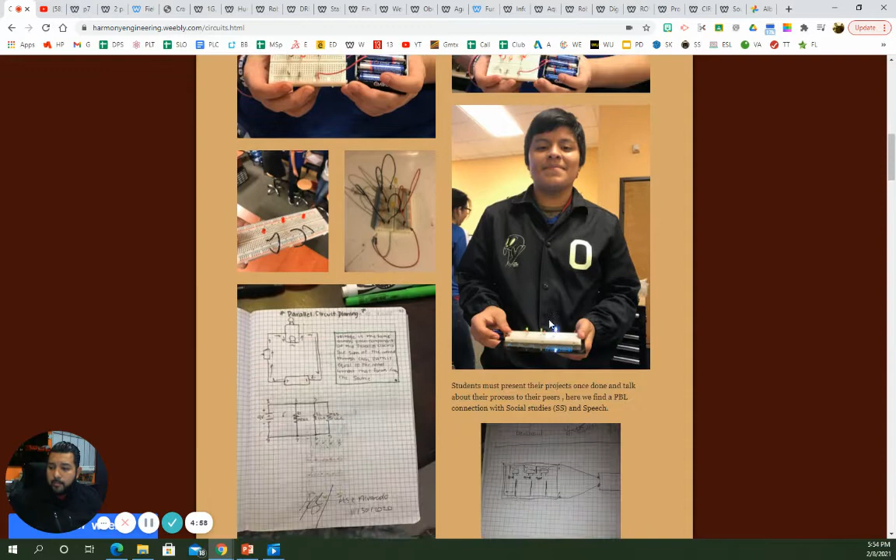Then the students have to present their projects every time they do one, and we get a great response in grades 10, 11, and 12. But for some reason, in grade 9 it's a little challenging to bridge that gap because the students are a little shy—they don't want to talk so much. I had students approach me saying, 'Oh, Mr. Cepeda, can I just please present after school when I'm alone?' And I'm like, 'No, you need to present in front of everyone. You need to present in class. Take your time.'

Perhaps you want to sit this experiment out, and then eventually you need to talk in front of people, so that they can get their confidence going and feel good about themselves, and then they get used to being able to talk in front of people. That's pretty much our main goal.

So anyways, we start with a little bit of theory. We give them a problem. They have to present once their experiment is done, and then they have this engineering journal where they talk about the different ideas they have and their approach. They do a little bit of research about their experiment.

This is a great way to connect with other classes because here we can talk about grammar, about the way they talk and describe their experiments. This sort of writing connects with the English department, and it helps out a lot, especially with our ESL students, because since they're learning the language, this is good practice for them. They get to learn about it here in engineering, but also in a regular English class, and it helps them practice. Sometimes they record themselves and practice, and that's a way to improve their skills.

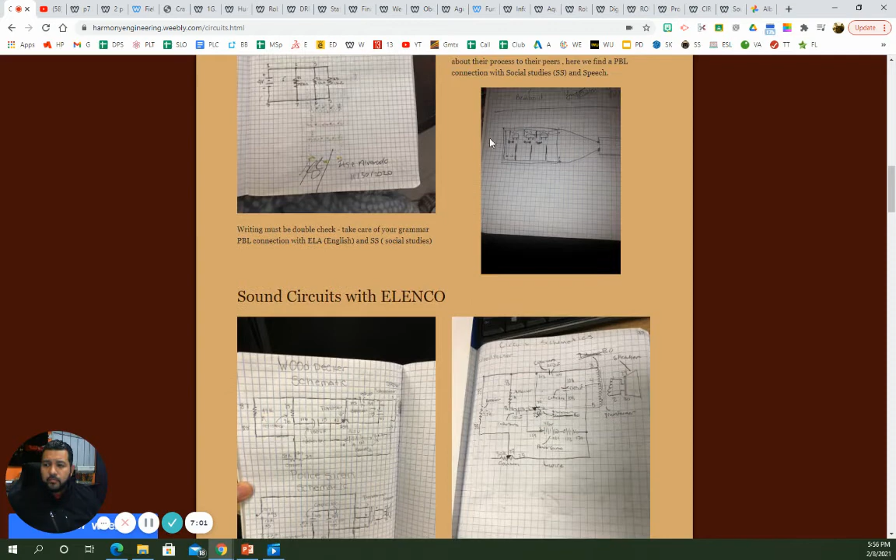Sometimes we get a little bit more complicated, but it all depends on the experiment. In this particular one, we began to talk about sound circuits, and I use this lab called Elenco. It has a manual, and I love this manual because it gives you a brief explanation of what the experiment is about.

It gives you the schematics of the experiment, it gives you a wiring sequence, and then it shows how your project should look by the time you finish. I love this because once the students are done, they can check their wiring with the picture. I also ask them to use it in their journal.

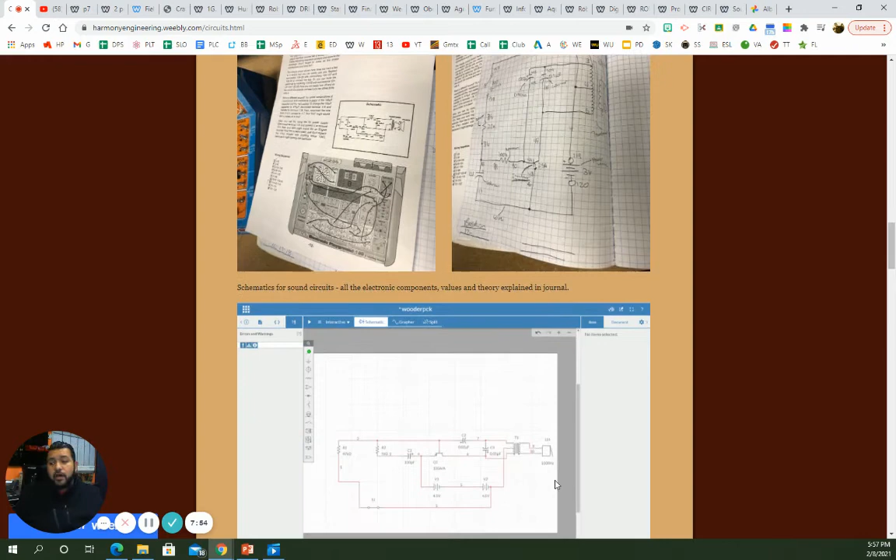So the first steps are to intro the topic. Then I ask them to draw the schematics in their journal, and then I give them the set of instructions. After that, I ask them to use this other software called Multisim, which is for creating and testing circuits.

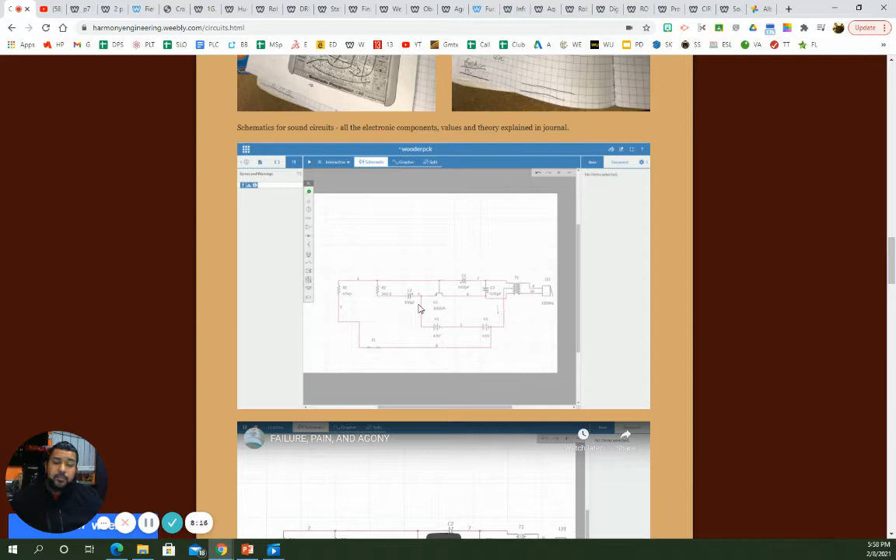It's a virtual application that we use on computers, but I like this particular one because it's live—it's called Multisim Live. The student can build their circuit in a live session, and it doesn't matter where they are, as long as they have internet access, they can build it, test it, and observe how to put it together.

They can find all these different parts with a little basic knowledge of electronics. They understand the different components and their electronic symbols, so they can find capacitors, transformers, or other electronic components. That's another tool I use with this particular experiment.

After they're done, we use this other program called Tinkercad. With Tinkercad, once they know what they're building, they can find all the different parts of their experiment here. Then they can use a breadboard, put all the components together, and test it. So not only can they test using this computer program, they can also test it, and then once they're done, they get to build them physically.

So then they build all these different circuits. Most of the time we start with sound circuits because they're the most fun, since they create a sound. I allow them to do 5 or 6 different experiments, or as many as they want, over a process of about 1 week or 3 different classes. They're using wires, connecting components, observing what they're connecting, and then once they're done, they create a sound.

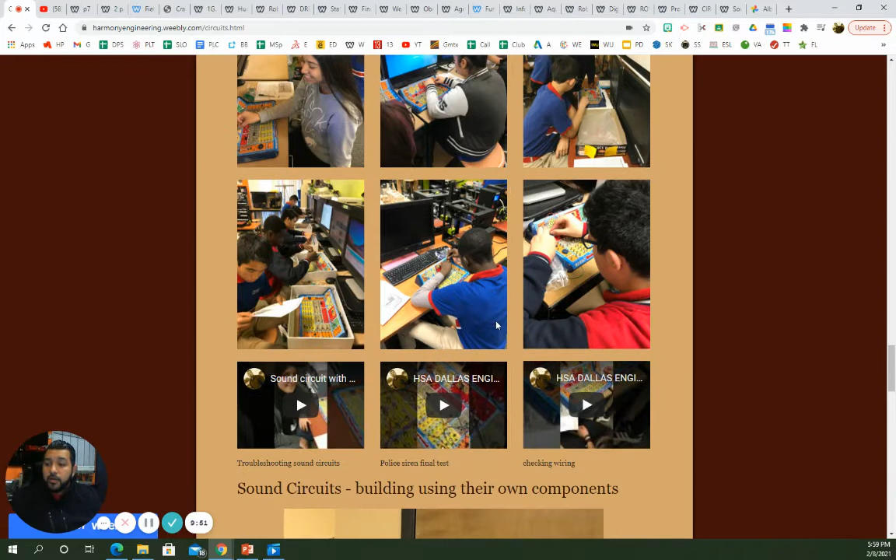And so here's an example of that.

Once somebody has that sound, everybody else gets excited and wants to be able to finish, so that's great for that. They also get to troubleshoot if something doesn't work, then they talk about it and learn how to connect everything together.

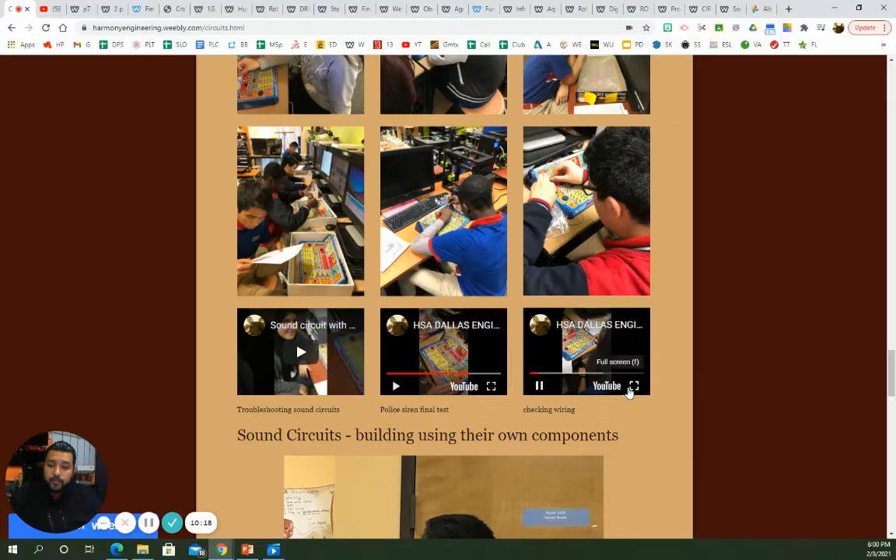First I connected all of the wiring where it's supposed to be and checked that the wiring wasn't messed up, because if it was messed up, one of the components would burn out and damage the whole thing. Then I had to switch some wiring too because some were dead in order for it to work. Yeah, see?

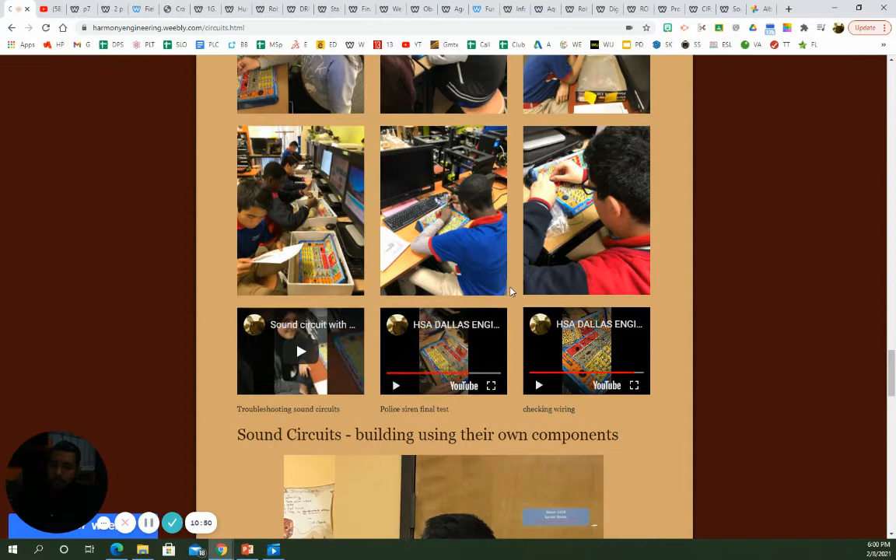So the best thing is that they're learning, then they're looking at the different components, building their own circuits. Once they're done, that's the second part of this project: I asked them to build their own circuits with their own parts.

For some students this is a little intimidating, but for students who really get into the whole world of circuits, it's a fascinating thing. So they begin to research all these different components for their circuit.

The advantage is that they already built the circuit here, so they're going to build the same circuit again, but this time using their own parts. They have to look for a speaker, voltage, some batteries, a transformer, and all those different components to put it together.

They have to be a little artistic to put everything together, all the information, little graphs. And that connects with mathematics, because you can talk about graphing, about data, and about all these different topics for that particular classroom.

So you would ask the teacher ahead of time that you're doing this with them and that you're going to be using graphs. Perhaps the teacher can talk about graphs in their classroom and ask for something as simple as a worksheet that students can turn in with their project. That would be a way to connect with this other class.

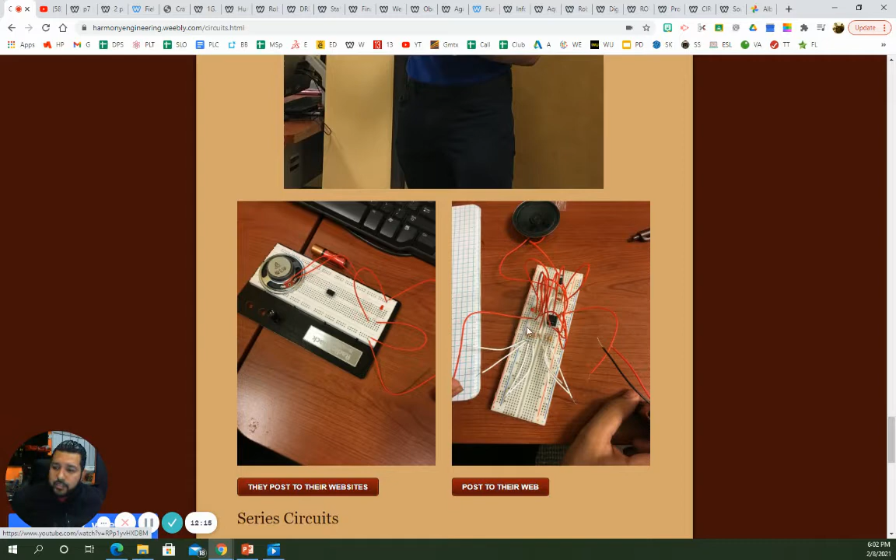As you can see, they have their own different components and everything to put together. And then once they're done, they have to create a website.

Creating a website is an easy process. I use Weebly, but there's also Wix and other similar website builders. The easiest one is Weebly.

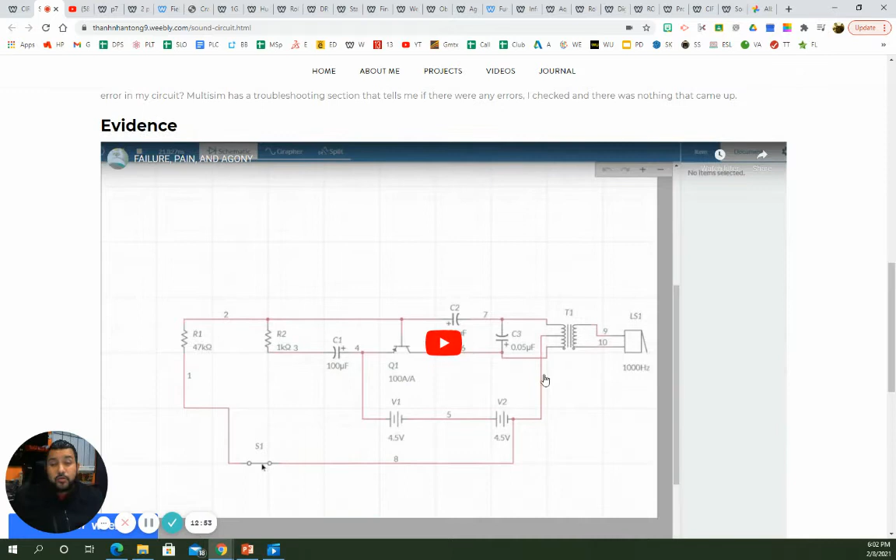So we use Weebly. As you can see, they use a title for their experiment, then talk about the problem that was assigned to them. They talk about the solution they thought of, and then provide some sort of evidence in the form of videos, like showing how they were creating that particular circuit I gave them earlier.

Then you can see the Multisim version here, all the different components, which they can add in the middle and then test. So they can virtually test their experiment before they build it, and that's important, because if it works here, it should work once they build it.

Then they need to add a few sources, and then give their feedback. I like these web pages because they can keep all their projects organized and keep all the information organized.

You can see the different tabs here for all the different projects, first semester and second semester. There's a list of different videos from the first and second semester that they watched, and a copy of their journal as well on this web page. So that in itself is a different project.

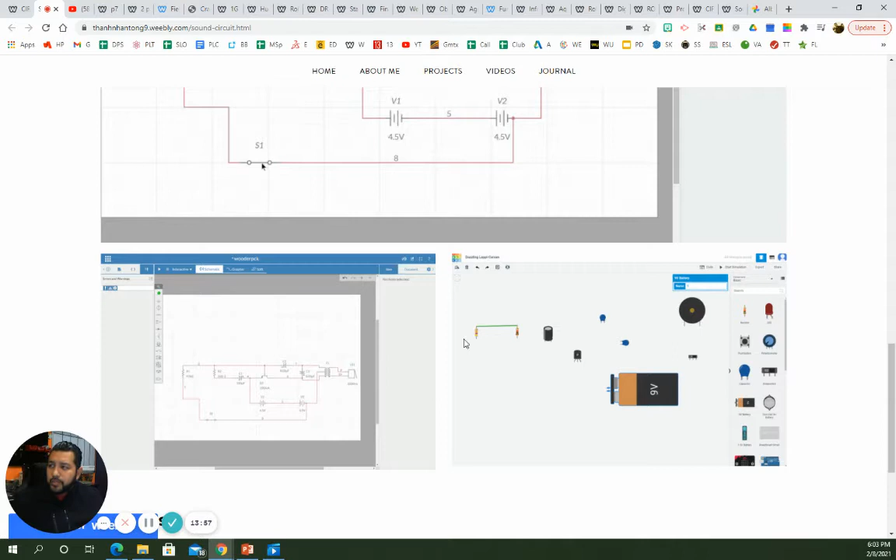So that would be the last step: to put everything together and post all the projects we have going.

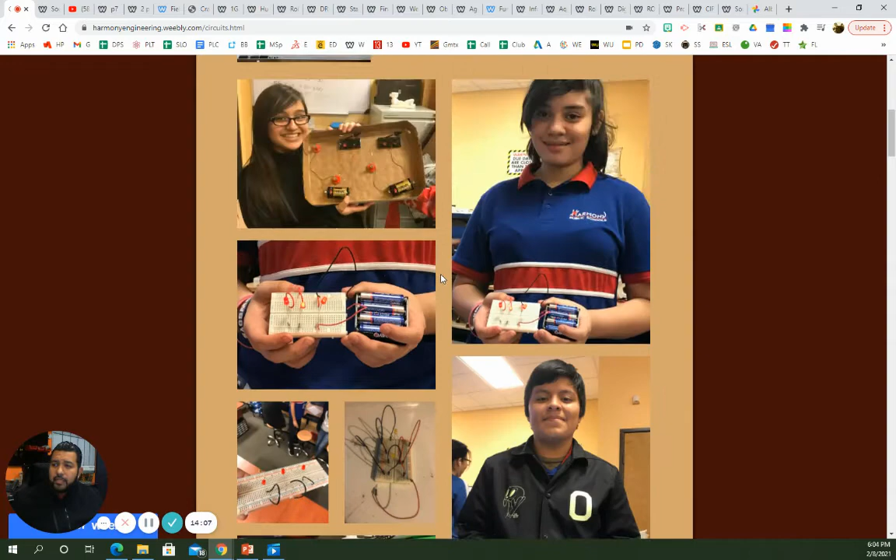Just to recap, the student is expected to pay attention during lecture and class so they understand what they're doing and building. We give them a problem, and they come up with a solution.

Once they have the solution, they have to do different ideas in their journal and document everything, put annotations along the side, put different designs there. Once they're done with that, they need to create their project, their prototype. And once they create their prototype and it works, they need to share it with the rest of the class, talking about their whole experience, the mistakes they made, and how they approached the problem.

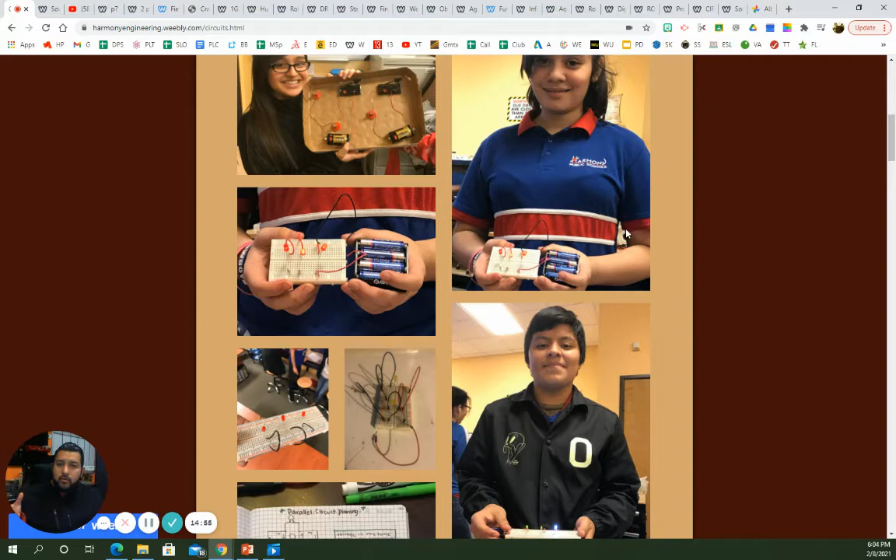Once we're done with that particular project, a simple basic circuit, either parallel or series, and once they've developed those ideas in their journal, they build it. Once they build it, they test it. Once it's tested, they compare with other projects by virtually testing their project to see if it works.

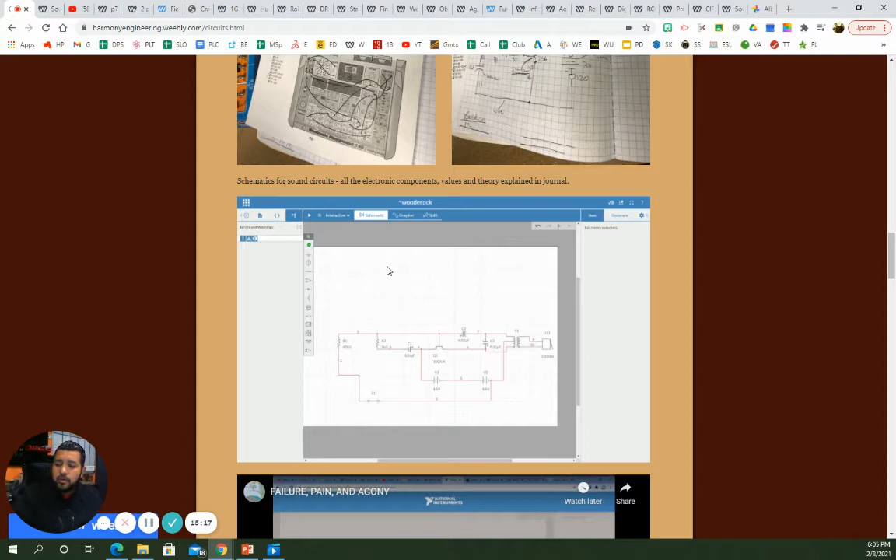They have software like Multisim Live, and another application called Tinkercad, so they can test their designs. And once they're done, they get to build it on their own. Then once they build it, they present to the rest of the class the whole experience.

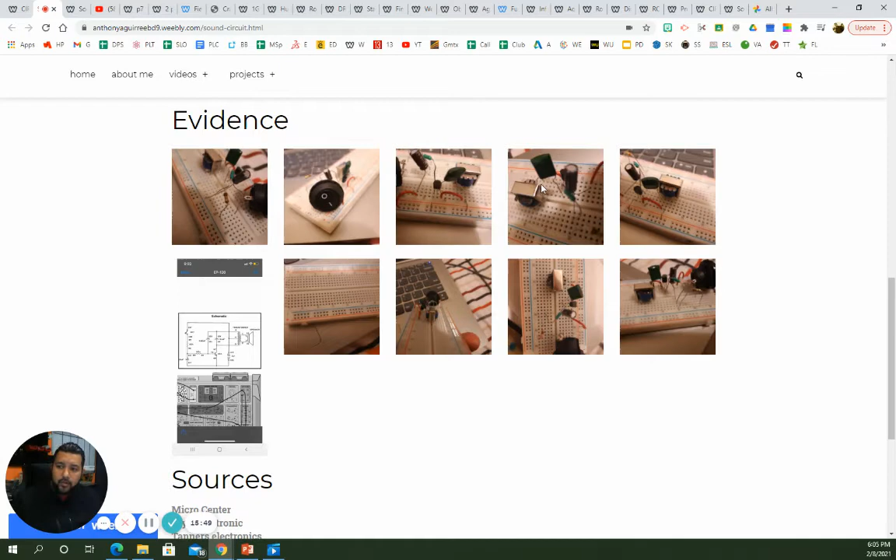Once they're done with that, they post it to their website, and on their website they talk about the whole process again, the different components, whether it was easy or hard, and we share all of that.

All these feedbacks and all this writing is also a way to connect with other classes, because other classes can focus on grammar, social studies, or speech, so they can voice out their whole experience. That's one of the projects I wanted to talk about, the evolution of the project itself, so you can understand how I use different projects from class to connect with other classes, and what's expected within that process for each project.

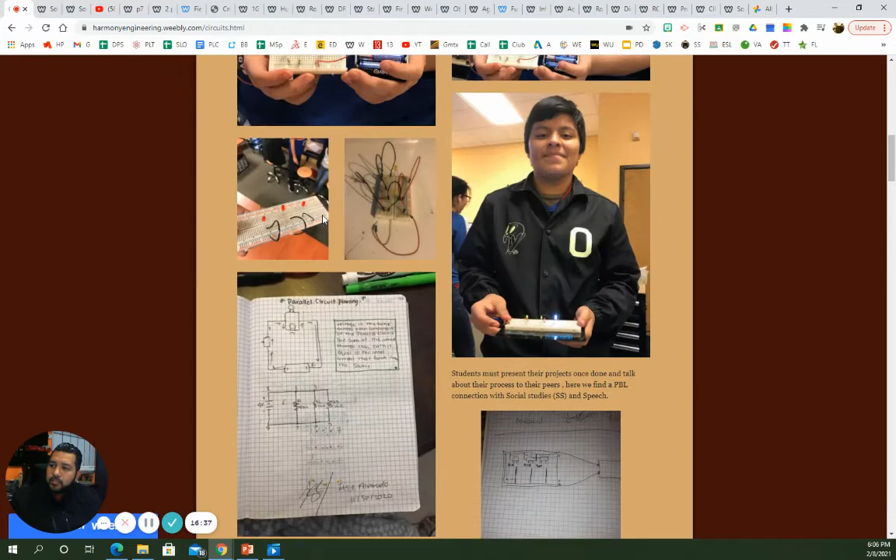Now I'm going to talk about all the different projects we have for our engineering class. Like I was saying earlier, I'm going to use this website, and go to this other one here called the Rube Goldberg.

Here's a Rube Goldberg experiment, it's a collision kind of experiment. One thing triggers another, and then it triggers another, and you use it to show there are all these different technologies and areas of engineering that in the end come together to put something together like this.

So we have different videos. They have to create a video, and then they have to present their video during class.

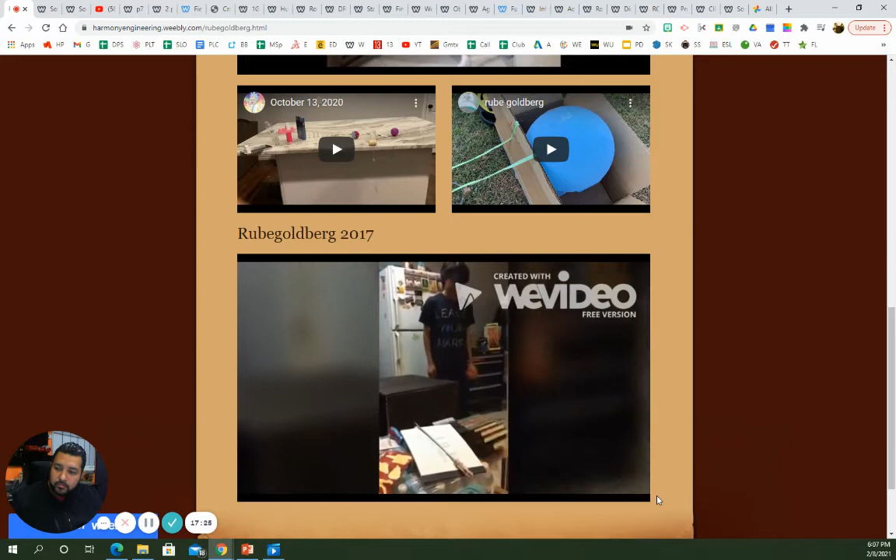This particular one was, they had to pop up a balloon. So here's their Rube Goldberg machine. That was a fail. Then they tried it again, that was a fail again, and then they tried it again.

As you can see, there's excitement involved through the process.

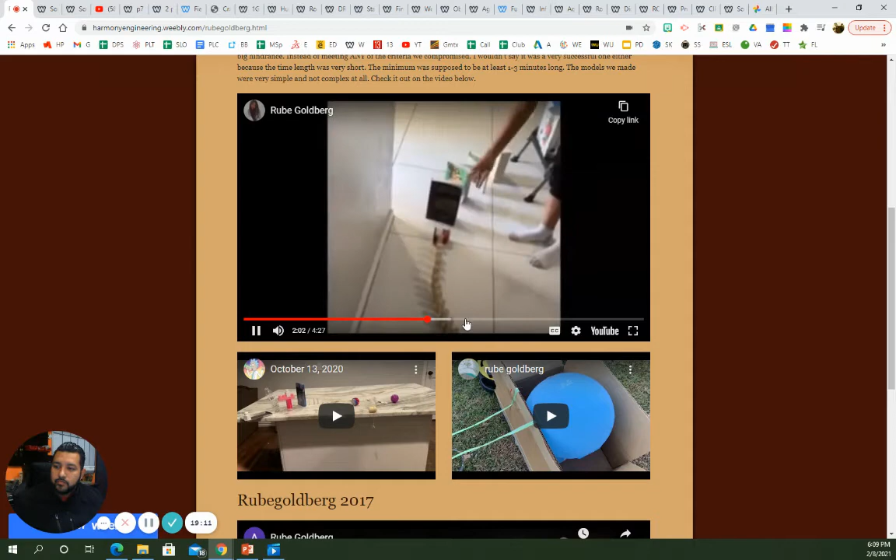Hello everyone, I'm getting ready to present y'all my Goldberg machine, and I'm going to explain the function of each station that contains the machine. To start off, this book is going to be thrown like that. What this is going to do is drop the boxes that are in this seat. As you can see, there's this bag of oatmeal placed on top of this box, and its function is to turn on the lights. I'm using two core technologies at once: the first is electricity, which I'm using to turn on the light, and the light bulb could be considered optical energy because it's using light, and that could be considered heat. Once this has been thrown like this, it's going to fall and turn on the light, and throw this ball into a box. This is my Goldberg machine, let's get started. One, two, three.

And so there you go, there's a lot of excitement through these projects. But anyway, that was another one of our projects, called the Rube Goldberg, and we use it to express different engineering core technologies working together.

Then we have this other one called the board game. In the board game, we talk about the different ages of technology, and they have to create a board game that they build themselves. Everything is custom made by themselves, and they have to choose a different age of technology as their theme.

What I like about this is that sometimes they get so creative, and they find a way to demonstrate their whole experiment, like through a skit. For this particular one, I really like the skit that they came up with.

Are you tired of your kids being on the phone? Get this board game now! This is fun, did you see how much fun these kids were having? Well, you can get this game board at paleolithicboardgame.com or call 1-800-PALEOLITHIC for just $19.99. You can get a special offer if you call now: buy one, get one half price.

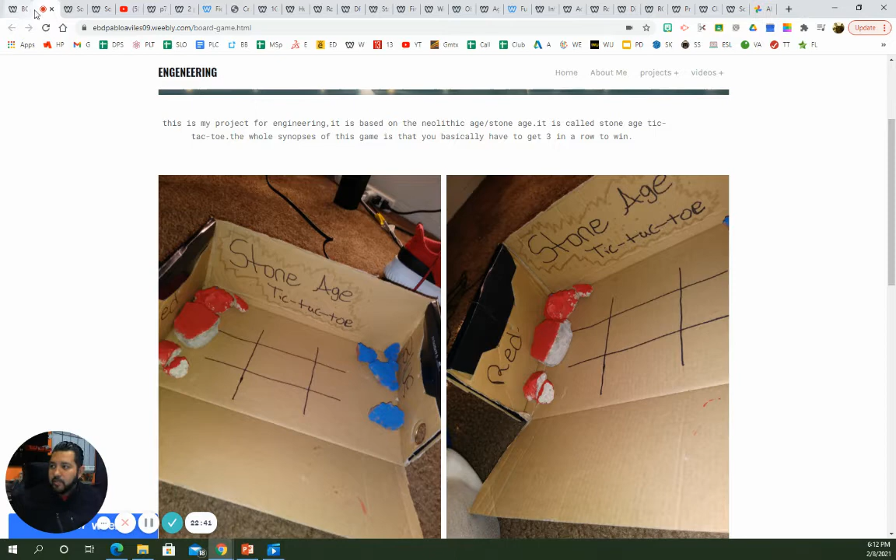Let me see if I can move to another one here. We have the one where we talk about the edible car. I like this experiment as well because they design it - they have to come up with an idea on how to create a car made out of edible materials. Everything in those cars is edible, nothing cannot be not edible.

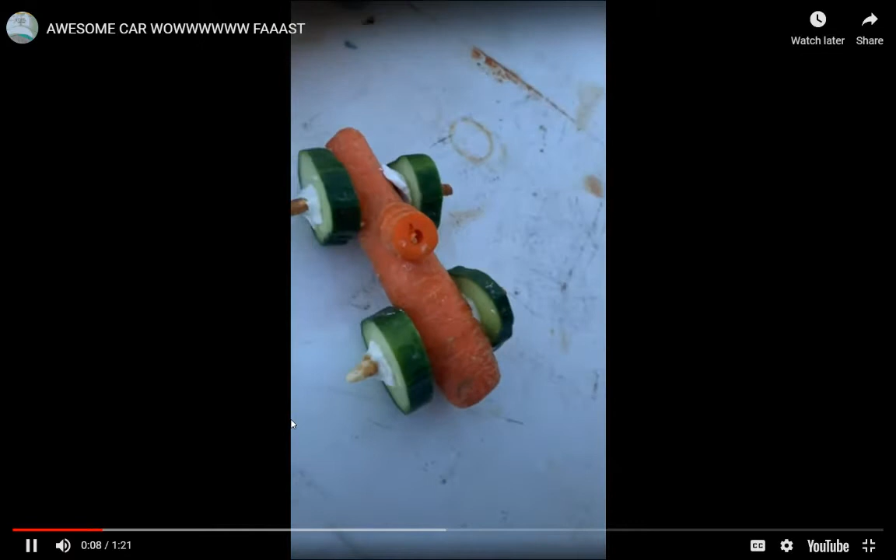And so then they come up with different things, and then they have to create their own videos. So this is my engineering car project - we were supposed to make a race car entirely out of food. As you can see, it's made out of food, and it's supposed to roll down a ramp. The car has to roll down a ramp without breaking, and it has to look like a car. I would say it looks like a car - some people would argue it doesn't, but I think it does.

So as you can see, they come up with their video and talk about their whole experiment. This is because we are in a pandemic, so they had to pretty much build their own ramp, because when they're here I provide a ramp, and they run their experiment through the ramp three times, and their experiment should not come apart.

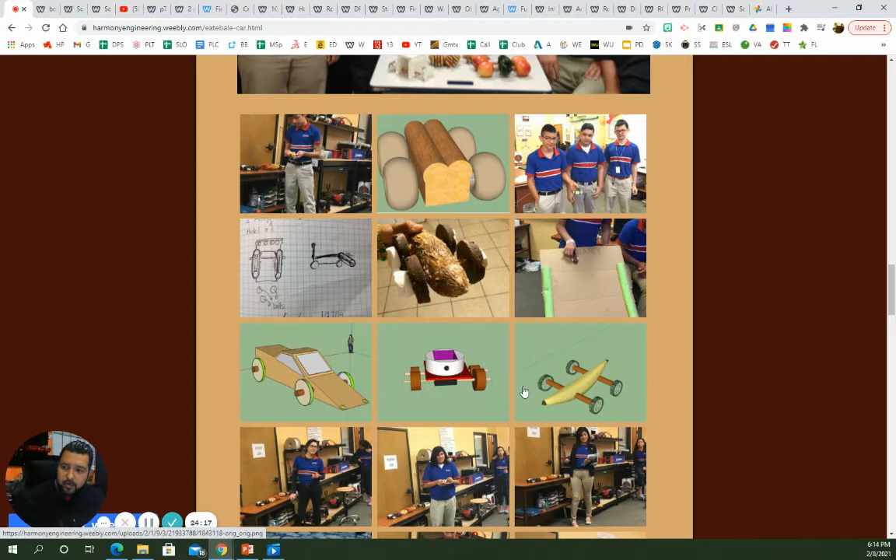So here are some examples from class that they built, and here's how they pretty much design in their journals. And then this is using CAD software, so they can pretty much show the expectation of their car and how it looks using that software on their computer. And then they get to build it, and present during class.

And here are different examples of the different kinds of cars that we have made through the years. And that's the edible car project. So I should have another one here - the rice and beans. This is like a sorter machine.

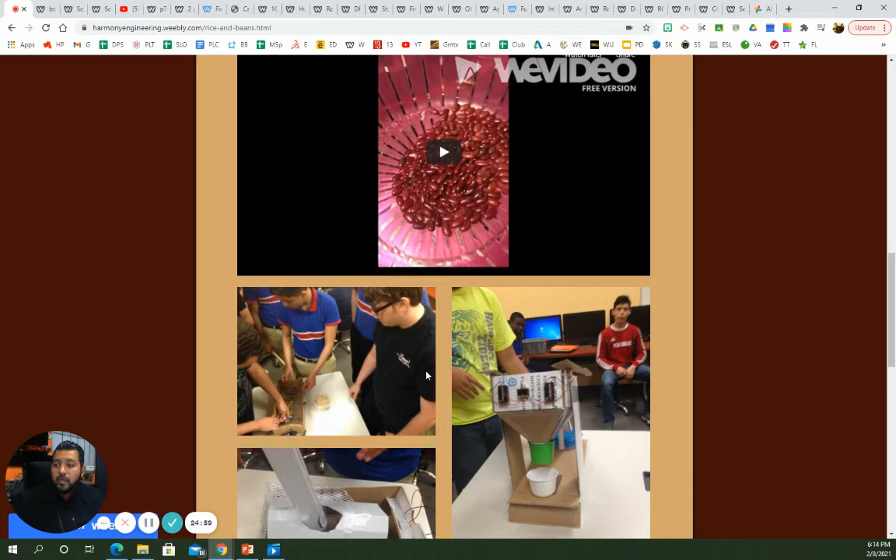They have to come up with ways to separate a mixture, and this particular mixture is a mixture of rice and beans, so they have to come up with some sort of solution to be able to separate them. Here's one of them - you can see they added little motors and batteries to make the whole experiment vibrate, and as it vibrates, it goes into one container for rice and then the other one for beans.

And here's another sort of approach - this is a different approach. But you can see, in the end, they're able to separate the beans from the rice. So that's an approach, that's an experiment.

And then here, I already talked about this. And this one, I already talked about this - this is the sound circuit. And then this one...

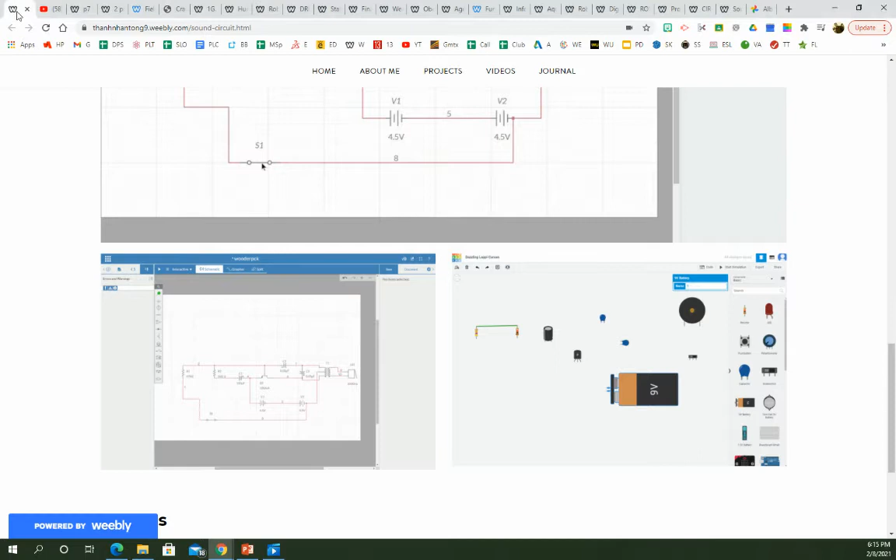This one I do with robotics, and I pretty much show them how to build a robot. And then here they pretty much talk about the whole experience of building a humanoid robot.

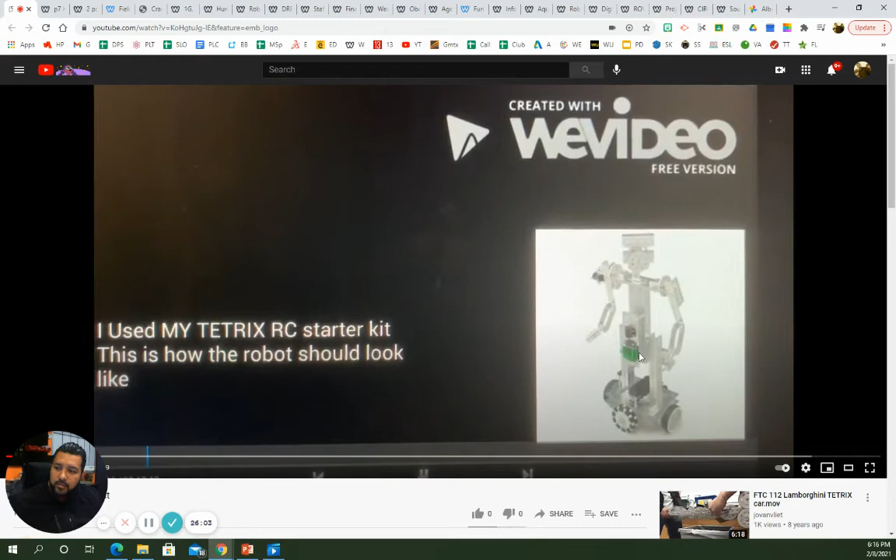So there's the materials that were provided to them. They use a manual, they use the Tetrix system in robotics. It's about $400, $500, but you can reuse them every year.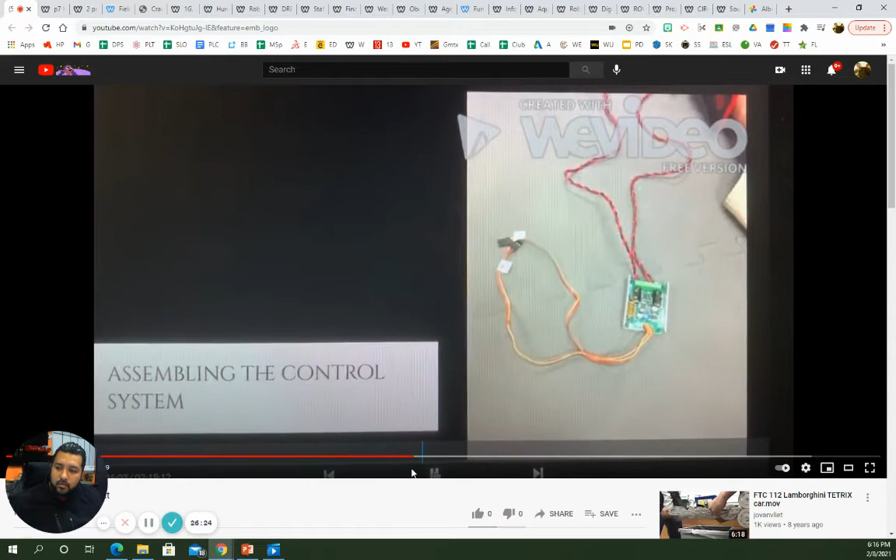You can see the manual there, it goes step by step. And then you can see a little bit on camera how they were able to put that together with their components to make that humanoid. You can see how they're attaching the different wires required to move the different motors and the different things on the humanoid robot.

It's a great experience, and it can be worked at all different levels. You can talk about different components of the robot, the transmitter, the receiver, the different gadgets. You don't get to code it until later grades, but this is perfect for them to be exposed to the world of engineering and robotics.

So that's a great experiment with robots and robotics. This one here I love, it's called the House Chore Solution Project, and the problem is they're faced with all these house chores, and they're pretty much thinking of a way of making that easier.

So for instance, this one, she commented that the way they used to clean the fan in their ceiling, they had to use a ladder, and then they had to use a towel and wet the towel and clean it. But then she came up with an easier version where she uses a little extension so she could reach out there, and she used that as her experiment.

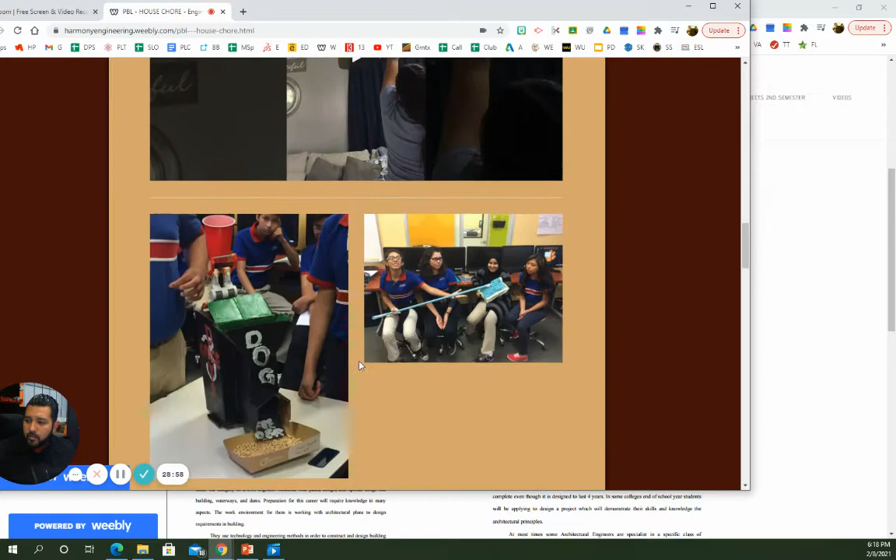So I'm gonna go up here and look for the experiment. It's called PBL House Chore. As you can see, I give them simple things like tape, paper plates, cups, paper clips, towels, brushes, all this basic stuff, in small amounts, and then I separate everybody into different teams.

And then I give them like 10 or 12 minutes to come up with some sort of idea to use as a solution for a house chore. So here are some examples.

One of the best ones are up here, like this one, which is pretty much the one you watched on the video, which we already watched. And then this other one here.

Hello everyone, my name is Henry Ramirez, and today I will be talking about my PBL Level 1 House Chore Project Limited.

Problem/purpose: for our class of Engineering by Design, we had to create some kind of contraption that we could use to help us do a house chore quicker and more efficiently.

Materials: like stated before, this was a limited project, and we had limited materials to work with. As you can see, the materials are really simple things that we can pretty much find around the house: 5 paper clips, 5 folders, 20 centimeters worth of string, and 10 empty bottles of water.

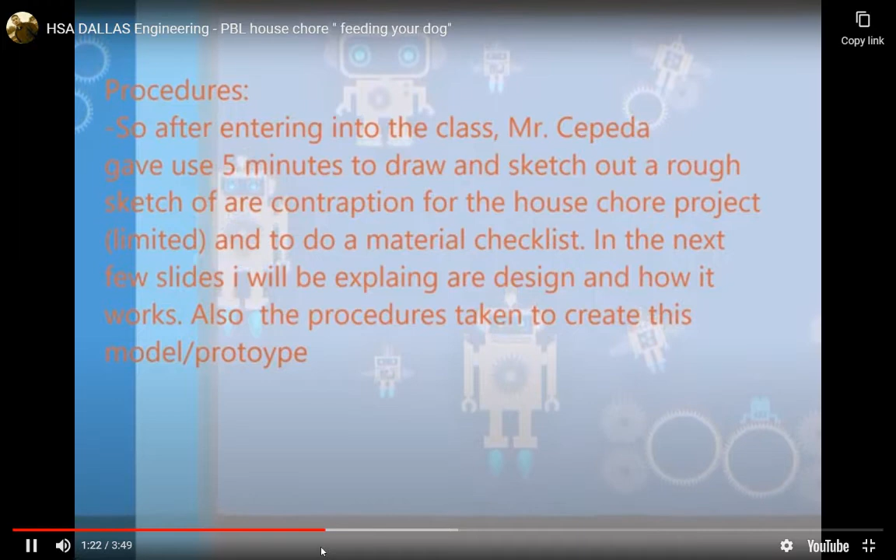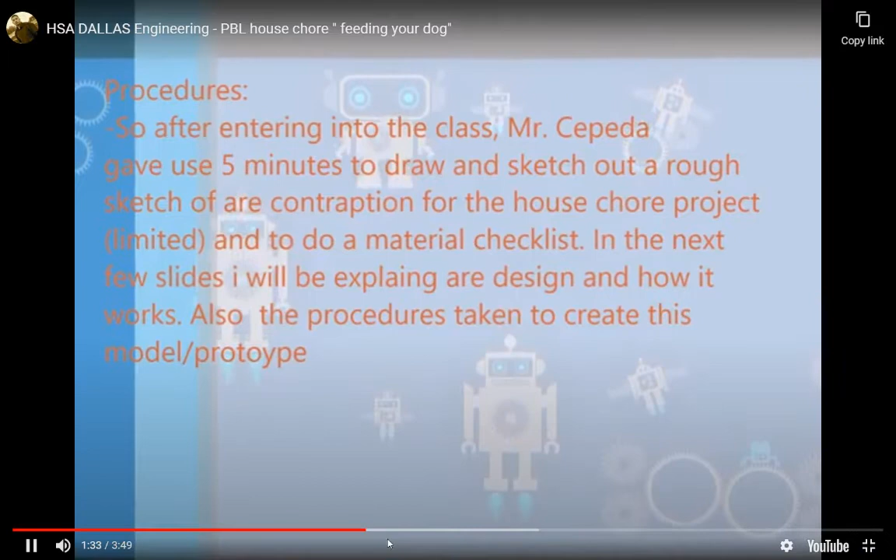Procedures: so after entering into the class, Mr. Cepeda gave us about 5 minutes to draw and sketch out a rough sketch of our contraption for the House Chore Project Limited, and to do a materials checklist. In the next few slides, I will be explaining our design and how it works, as well as the procedures taken to create this model/prototype.

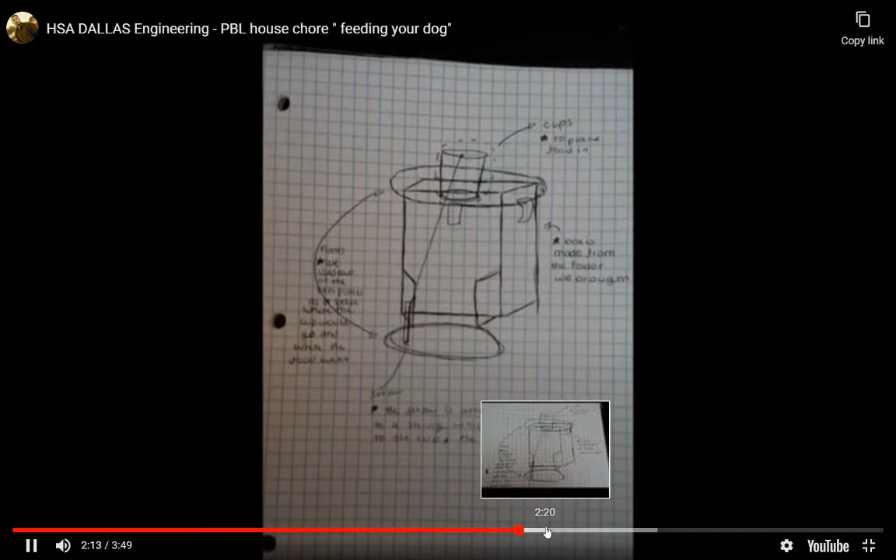And that's their video presenting their whole project idea, which I like because they came up with a dog feeding machine, and then later on with unlimited time and materials, they were able to come up with this here. They had a sensor, a microcontroller with Legos, and then they were able to put some food out here with that sensor. As soon as the dog was in close encounter with that sensor, it would drop the food into the container.

And so that was a pretty cool design or idea that they came up with during this experiment. The other thing I like is that they come up with skits and ways to promote their projects or announce their projects. So here's another skit.

Do you ever just have the worst chore to do? Like, what is that chore? Clean the toilet floor. It's super nasty and it smells horrible, and it has germs and that nasty stuff. Well, this is our solution to it, because it's the perfect thing to use for toilets, for maybe doing the floor too, I guess. But this, I didn't come up with it. Toilet Cleaner 500. Okay, yes, it works. You put it on your toilet and it scrubs and washes your toilet at the same time. And when you're done with it, you just flush your toilet and everything is clean.

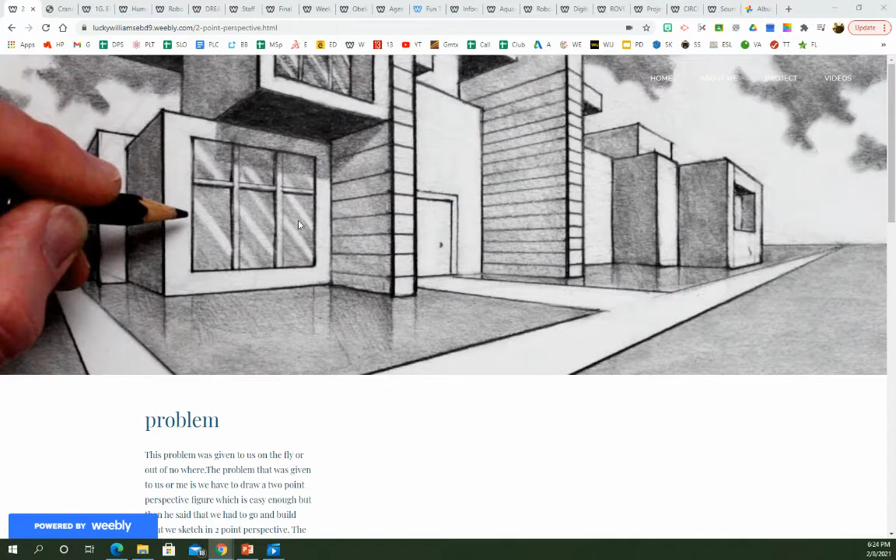This experiment here I like because they begin to do a little bit of sketching, so they have to learn how to sketch. They start from one dimension to two dimensions to three dimensions, then they do one point perspective, two point perspective, and isometric sketching. So they begin to sketch a little bit better. This whole experiment begins with a sketch like this one.

Once they have the sketch of their house with the two point perspective, they have to build it, with a finalized sketch like you see here. Let me see if I can double click on it. Once they're done with that, they have to look around their house for all these different materials, and then build their prototype of that particular house or sketch. So that one is pretty cool.

This one is called the crane, made out of popsicle sticks, string, and glue. This particular structure they come up with looks like a crane, and it has to be able to hold at least 15 pounds. We use weight in class and keep adding weight to it. The kids love this experiment because they can see what will be the breaking point of their crane.

Let me see if I can find one. It doesn't seem like I published that one, but let me see if I can find another one. You can see the whole process, their feedback, and the different sources. Here's Weebly.

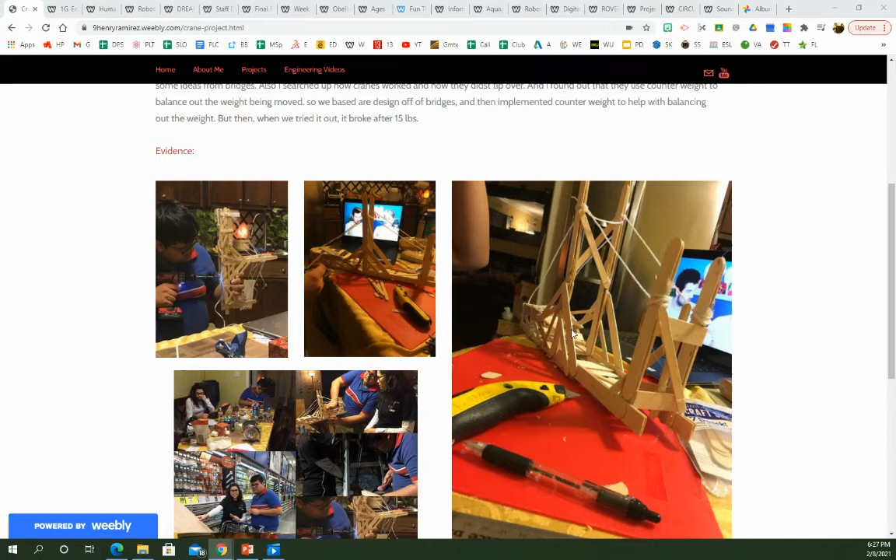All right, but you get the idea. They placed it on a base, and then they add weight on one side, and find the breaking point. You can use this PBL with physics because they also talk about structures and breaking points, or you can use it with math, or with English. So different ways of connecting with other classes.

I think I already talked about this. They had to design some sort of car made out of edible materials, and then they have to race their car. So that's a different project. This one, I already talked about this one. That's what they do, robotics.

This one is called the robotic arm, and I love this particular experiment because there's a whole lot of different ways of dealing with it. You can start with something simple as using some cardboard, a motor, some batteries, and a string. With that, you should be able to make some movement.

This particular prototype is made out of popsicle sticks and some strings. Then you have motors or servos, motor controllers, a package of batteries, and push buttons. If you push a button, you activate one of the servos, and it would move that hand or part of that hand.

This other one is a little bit more complicated because it's 3D printed and has linear sensors. So they began to do their own research about linear sensors and how they work, and mirror your movements.

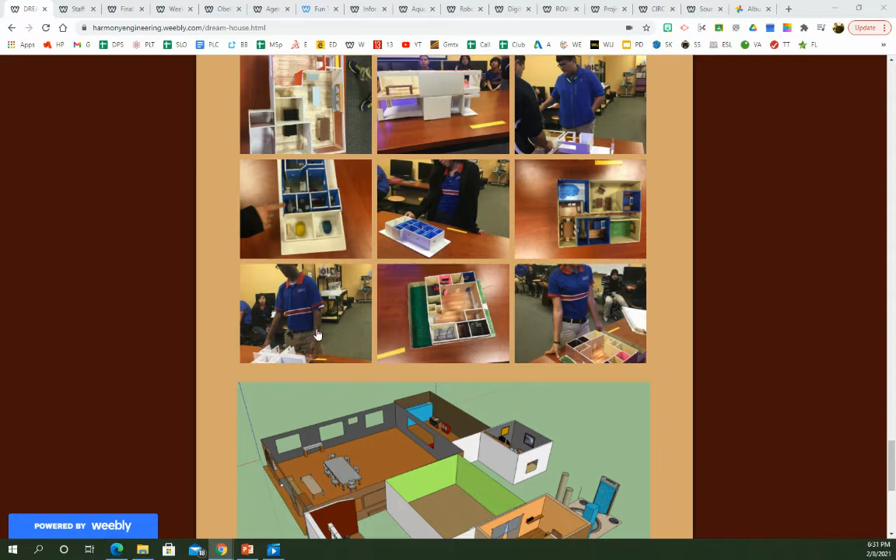This other experiment or project is actually 3 different ones. The first one, the students have to do a little bit of research about houses and the things they would find inside their houses. They do a budget research, different salaries, different careers, and then they connect with other classes.

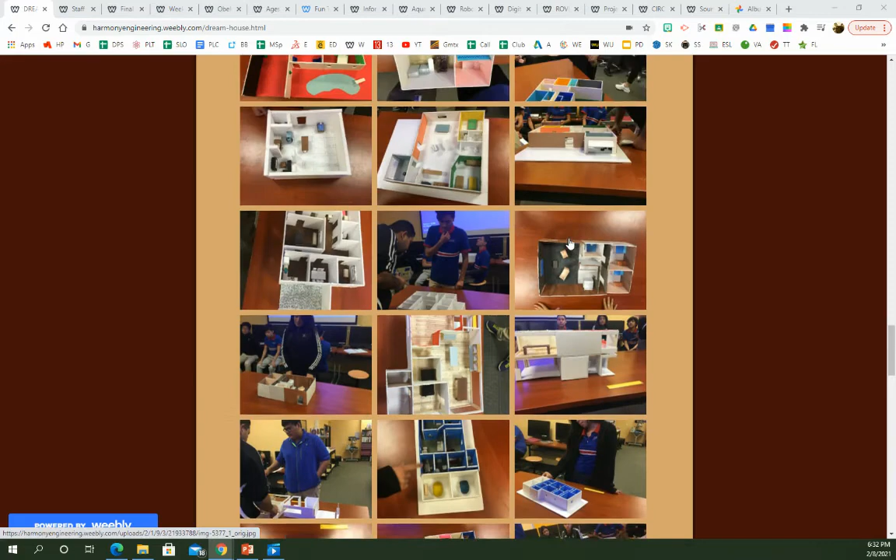Once they do the research, the way to approach this project is that they have to design first in their journal. Once it's done, they talk to you about it, and then once they're done, you approve just one room. That's where you start, so they can experiment with different things they find around their house to create just one room.

Once they're done, instead of one room, they create an entire house. Of course they get a little bit more time to create more space and more things for an entire house. Like this one, you can see all the different details on the kitchen, a lot of different space within the house, and how they were able to design their house.

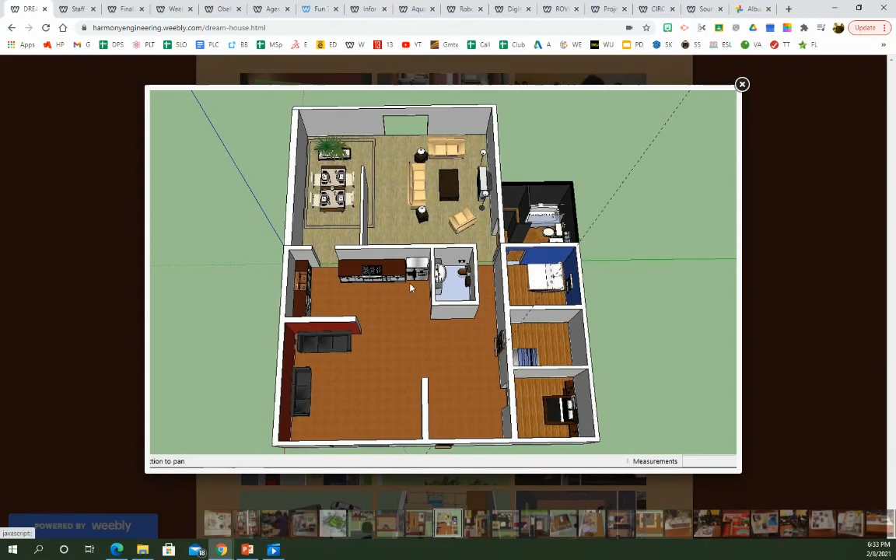They have to design it in their journal first, and then do it in software. In our case, they use Google SketchUp. Once they have the software, they're able to visualize the things to find in the different rooms. They do research to know what to find there, and when we talk about budgets, they find out how much they need to make each month to survive on their own.

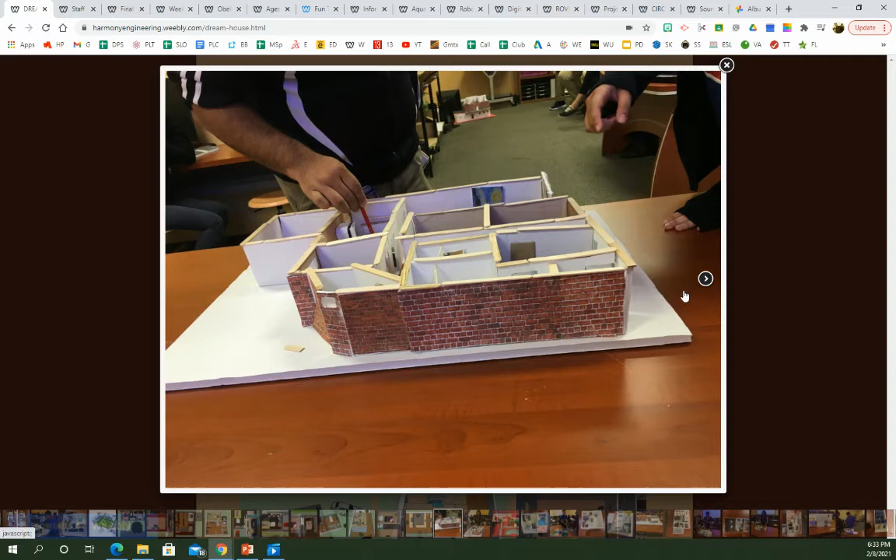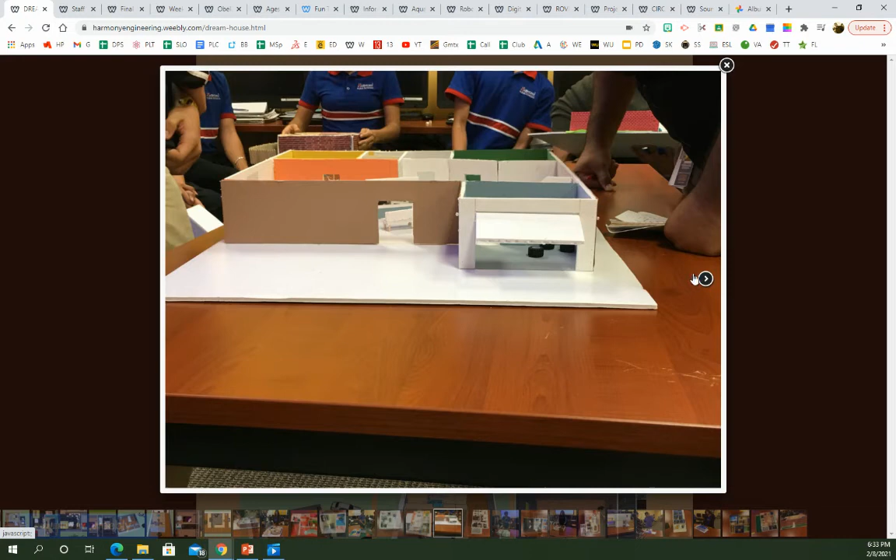This is a pretty cool experiment, very real. Some students do a little bit less detail, others add a lot of detail, or their houses look really clean. But everything in their house is custom made. This one is pretty cool because it has a little garage door that opens and closes, with a little motor on the inside. That one was pretty cool.

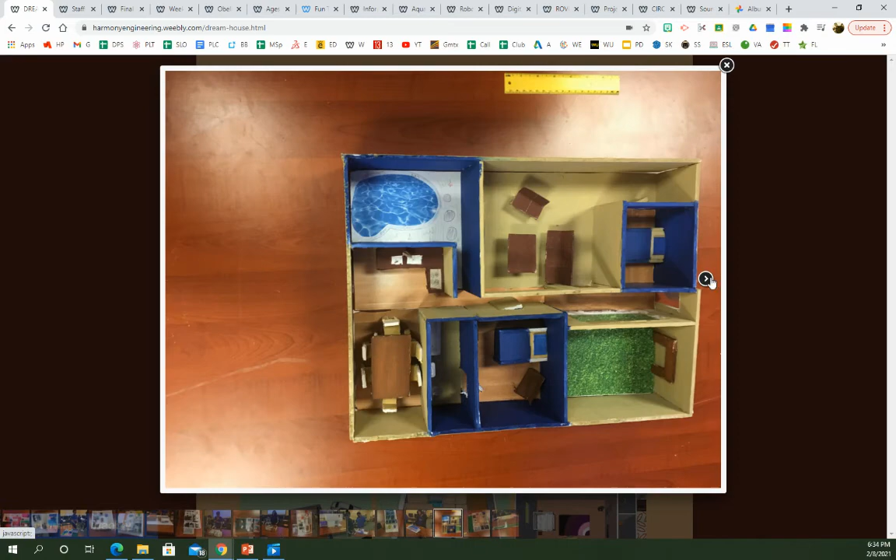Here we have different ones. We talk about the scales, because the things inside their house have to make sense. Sometimes they have a bed that's the size of the entire room, and you have to think about whether that's real or not, because a bed shouldn't be that big. Then they talk about the whole layout of their house, and why it's the house of their dreams, and why they'd like to live in a house like that.

This one was pretty cool too, because he had lights. The kid added LEDs to it, and as you turn the LEDs on, it seems like the house had lights on it. So that was a pretty cool house. You can see all the different houses they have, and of course they have to have that design. That would be the second one.

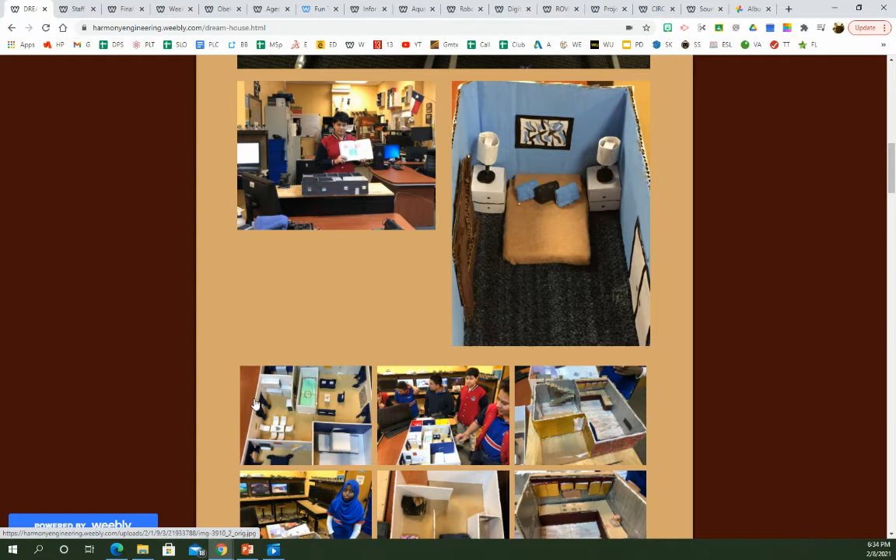So the first experiment is one room. The second project is the house of their dreams, so they build their house of their dreams. The third one, you involve the faculty or staff at your school, and the way to do that is you have them design a house for someone else. In this case it would be a staff member. This one is one of my favorites because this particular staff member wanted a restaurant underneath and wanted to live on top.

This one has the design of an entire restaurant. You can see the little tables there, you can see the bathrooms here. Everything is made out of kind of like glass. He has these towers to support it.

Then he had this whole apartment unit on top with a lot of details for a resting area, a masterpiece for the person to live, a little fan or ceiling fixture on the ceiling, and overall it was a great design. The teacher actually loved it and kept the whole project, and the student didn't have any issues with that — he wanted her to have it.

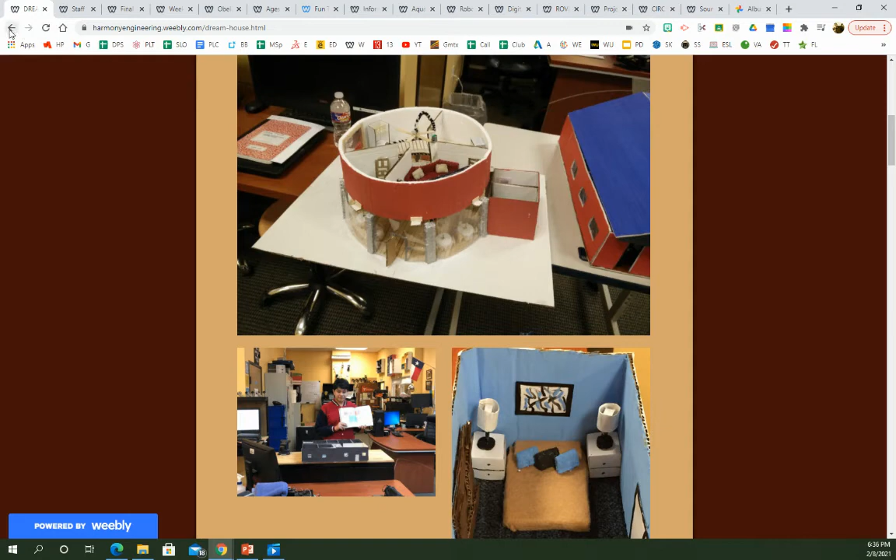So that's also a great experiment to be able to connect with other staff members and other classes, to get them involved. Then later on you do more academically oriented lessons, like mathematics or physics or statistics. That's called the dream house experiment.

This other one talks about the same thing. Nowadays, with distance learning happening at home, this is a great experiment for that. Here's the video for this particular student.

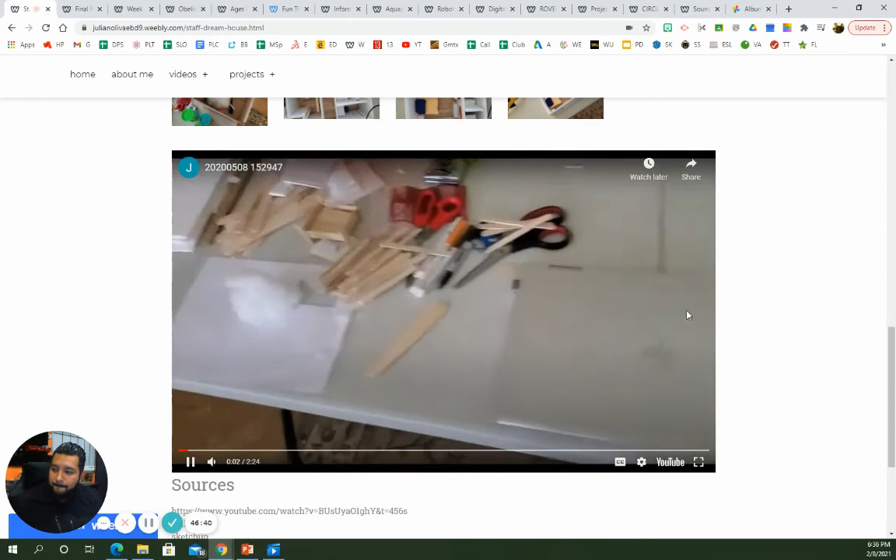He talks a little bit about it. Julian: This is my house project. My client, Ms. Duong - thank you, Ms. Duong, for being my client. So I'll start off with how I planned it. First, I sketched it up. I interviewed her, gathered every piece of information she gave me, and built a SketchUp plan. Then I got all the measurements needed for everything inside the house.

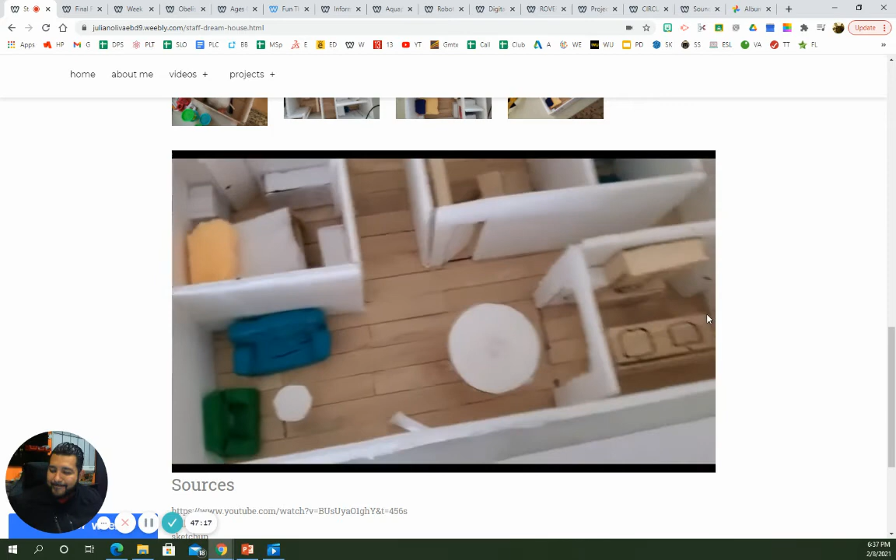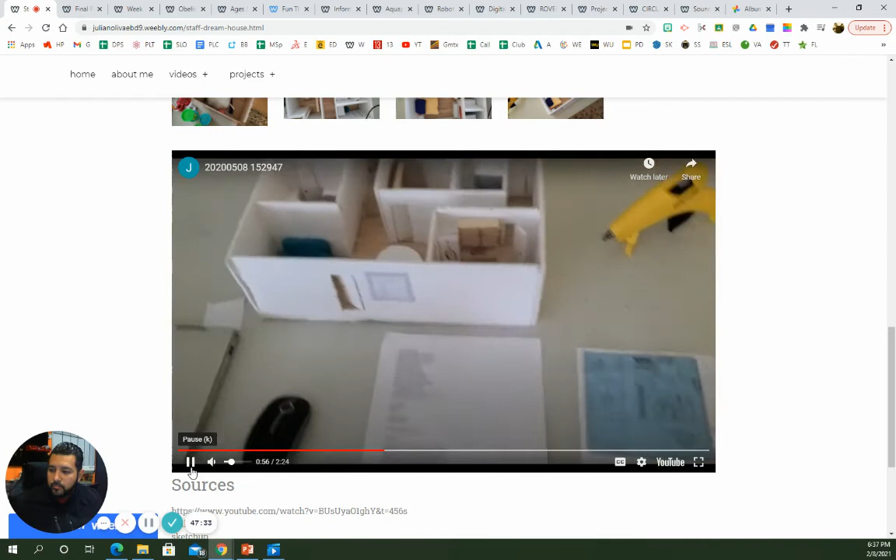I printed both of them out so it would be easier for reference. I first started with the wood foundation right here, and after that with the poster boards, which would be the walls. For the wood foundation, I decided to use a certain pattern that some houses use, kind of similar to my house. Most of the materials I used were popsicle sticks, sanding, and Play-Doh. The cost to make this house was at most maybe $15.

Because I didn't really use much from stores, since I already had a lot of materials from previous projects. So there you go - by doing projects often, you can recycle some of those materials. You can see their whole experience through those videos. It's always fascinating to hear their perspective through videos.

This other project is called aquaponics, and it's a combination of different things. Here's pretty much how the project begins - you have a fish, and it's like two living organisms. You have a fish feeding a plant, and a plant feeding a fish.

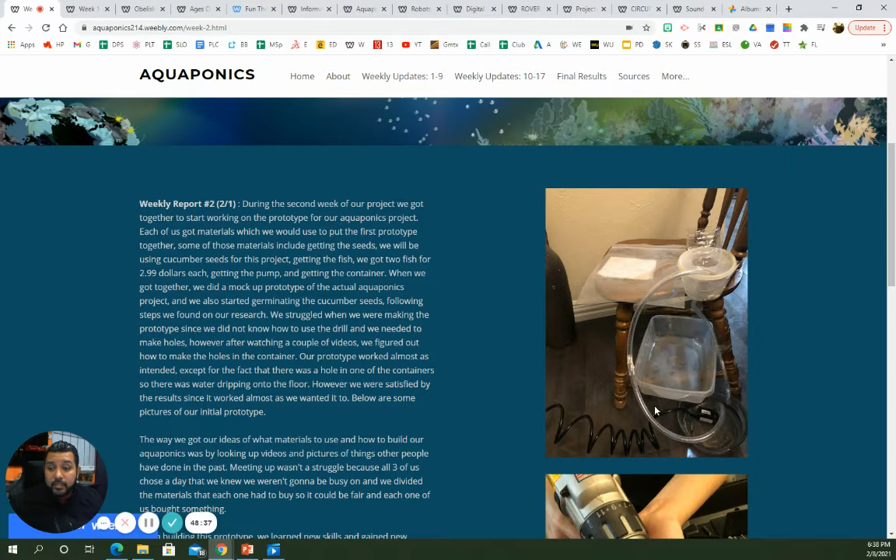You have weekly updates so you can see what the student did during that particular week. You can use this experiment to connect with other classes and get help on writing, overall feedback, or physics help on the things they're experimenting with. Most of these things you can find at home, like little containers - they're just laying around, and you can use them for an experiment like this one.

With the different updates, you can see their progress and how they're able to build. This project can also be used for environmental studies or social studies, studying the environment or science since you're using a plant. You can talk about how plants grow, the different kinds of plants, and different kinds of fish - which ones grow faster, which ones don't grow at all, which ones died and why.

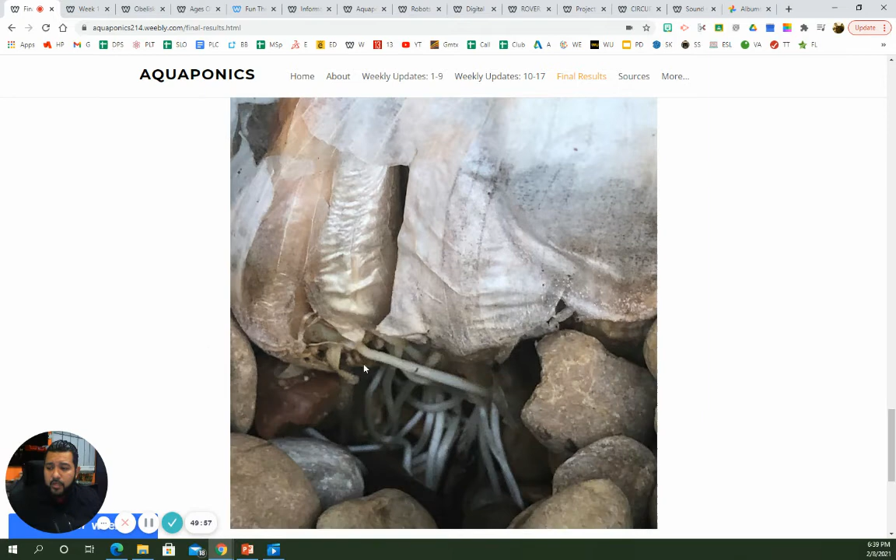You can talk about the pH in the water, and about using sensors, like Arduinos, to control those sensors, code them and program them. There's a lot of things you can do with this kind of experiment because you can use it for any field. Of course, you can ask them to create a whole website, and once they're done, have them give you the final results of their experiment and their feedback. That's how the experiment finalized.

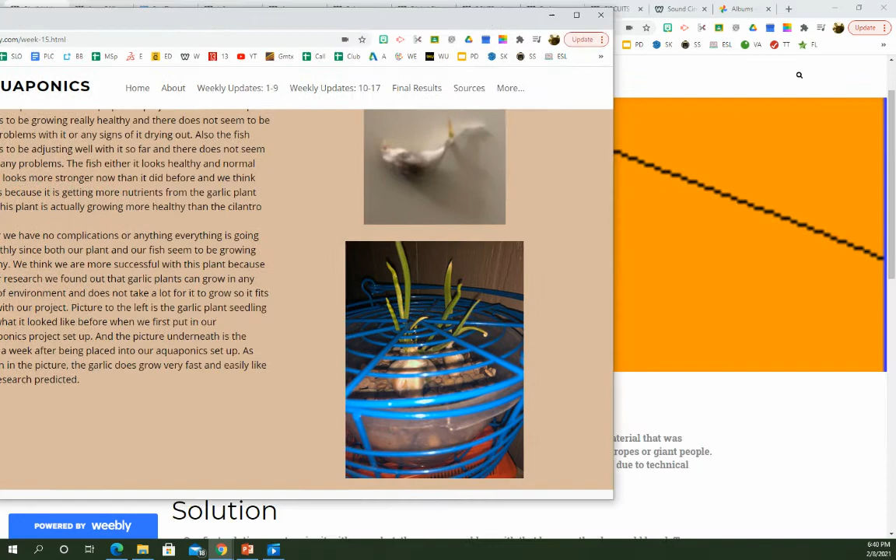I love that particular experiment because it has two parts and you can use it with any class, because you have to do a lot of research. We already talked about the age of technology earlier and the board games.

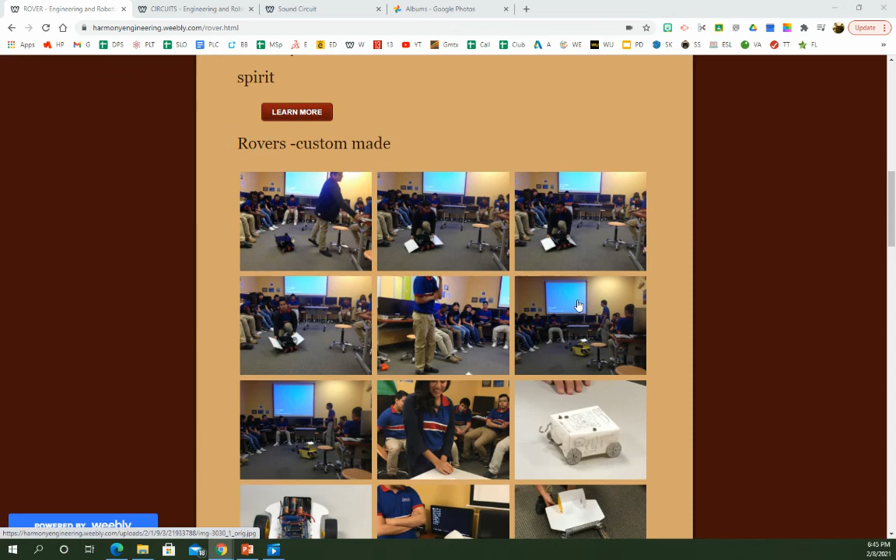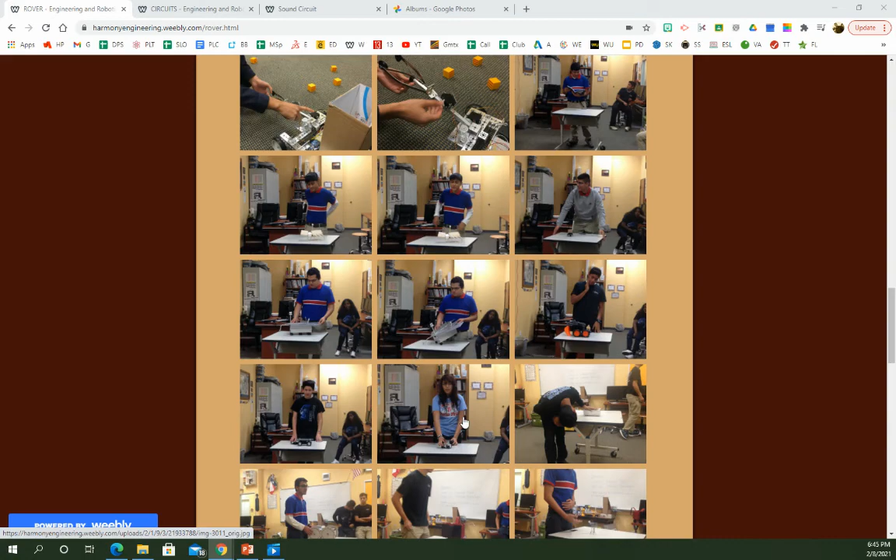This other one is for space exploration. They have to design a rover - some sort of machine to explore space - then present their whole idea and justify whatever it is they built, using their own materials.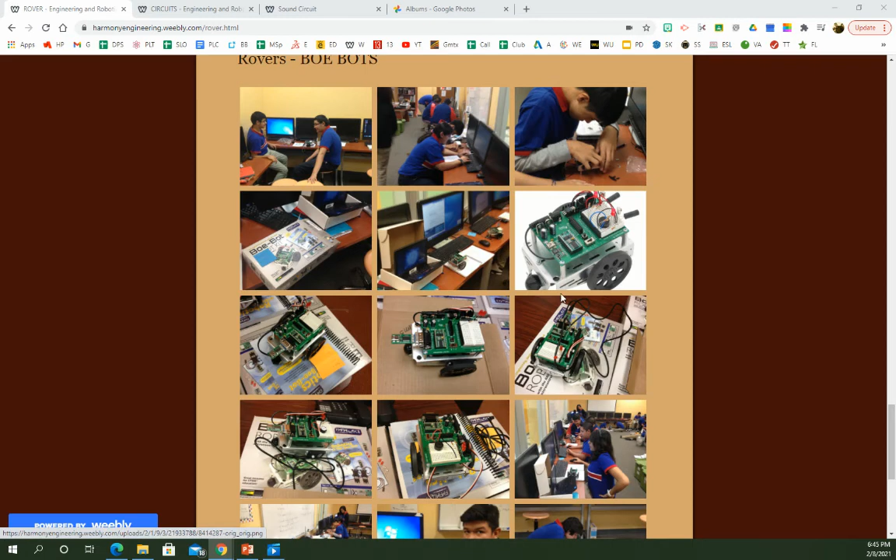Once we're done with that experiment, we move on a bit to robotics and use this prototype called BOE-Bot. It's a kit sold through Pitsco, and the kids put everything together, learning about circuits, sensors, and the whole exploration of Mars, so they get a better idea of what's going on with the rovers. I like this experiment a lot too - that's called the rover design.

I already talked about this circuit - I already talked about the sound circuit.

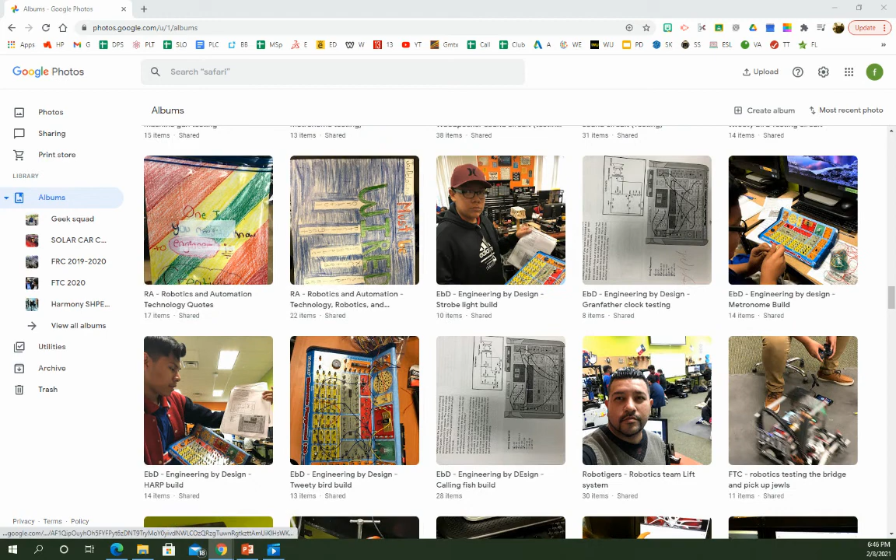And here I have other projects that I've done for different classes. I think I talked about the different sound circuits that we've made. I didn't talk so much about posters.

So when the students arrive, they have to make posters that have to do with engineering. This is a great experiment to use with other classes as well, because they have to write. Sometimes they don't write that well, or they don't know how to put things together, or how to use a particular software. That helps connect with other classes and their grammar. So everything is related to engineering.

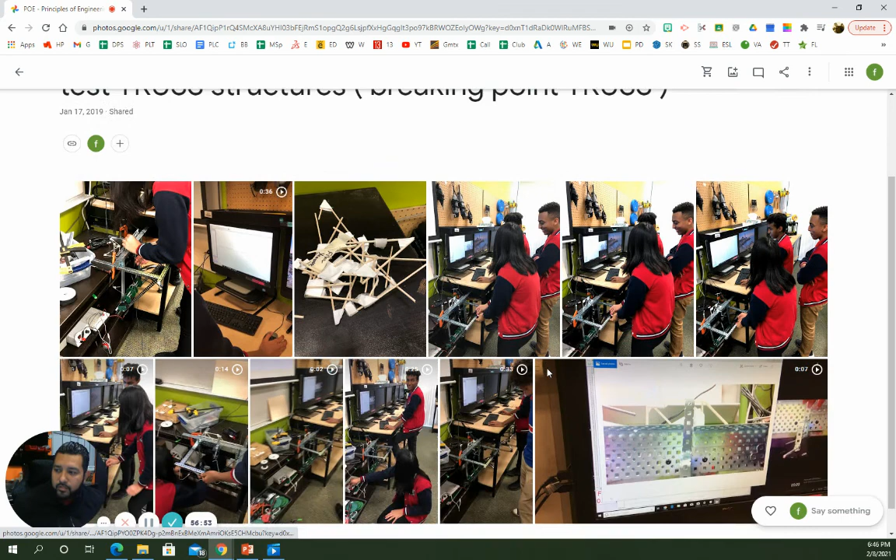Other than that, we have this other one that deals with bridges. That's for a specific class. They have to build this sort of truss, and then build this truss machine, and then test how strong these structures are and find out the breaking point. Then they graph all that data.

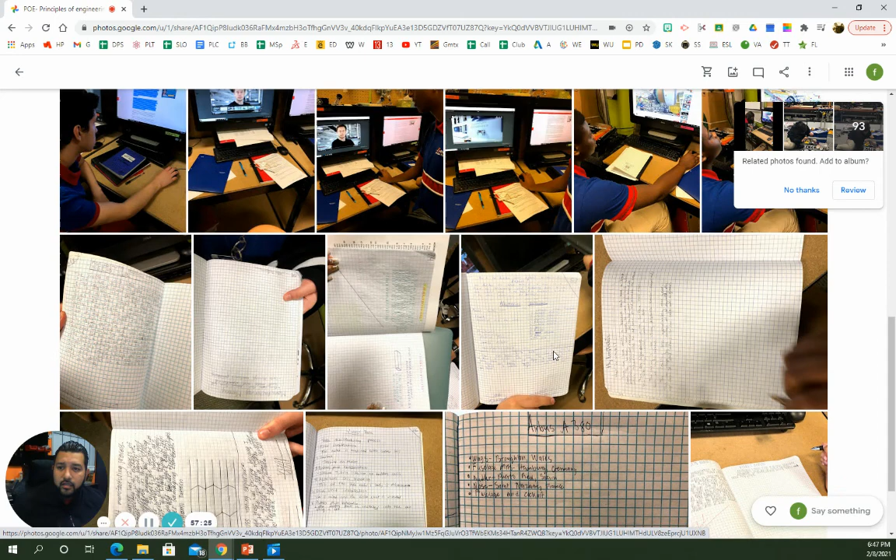This is for manufacturing process. They have to do a little bit of research online, search how things are being made, and then write everything about it, like the whole steps, the different things that come into place to manufacture some sort of device or experiment. So that's for manufacturing. We do a lot of robotics related things.

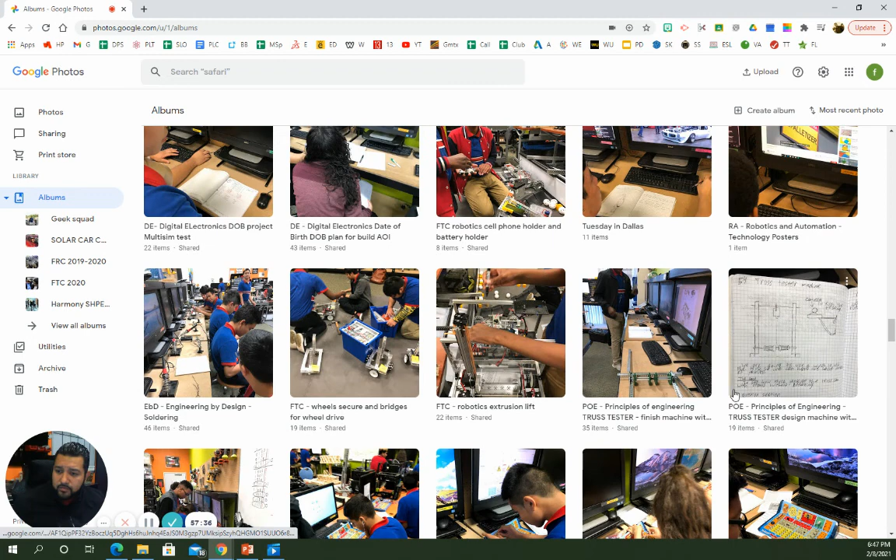As you can see from here, they have to... This is for the truss tester, that machine that helps with truss and breaking points. They have to do it in their journal, then in software, and then test it and actually build it. So once that's done...

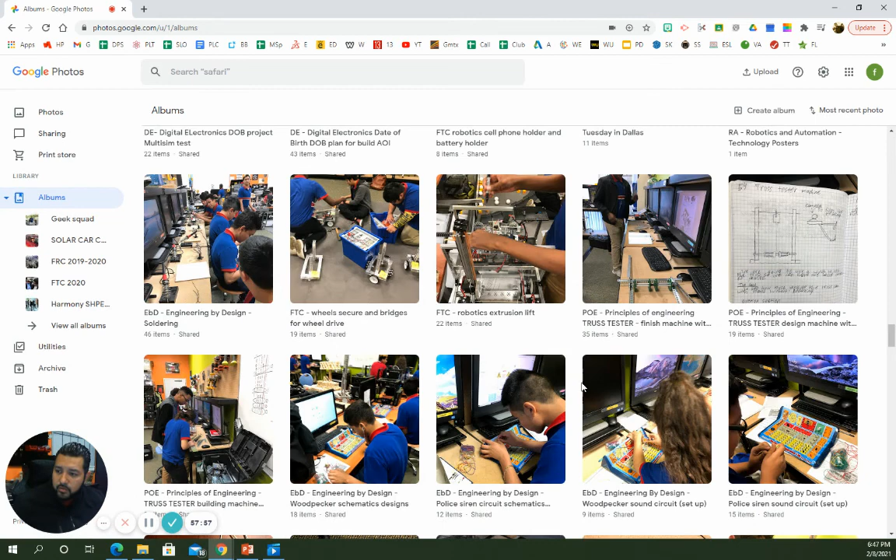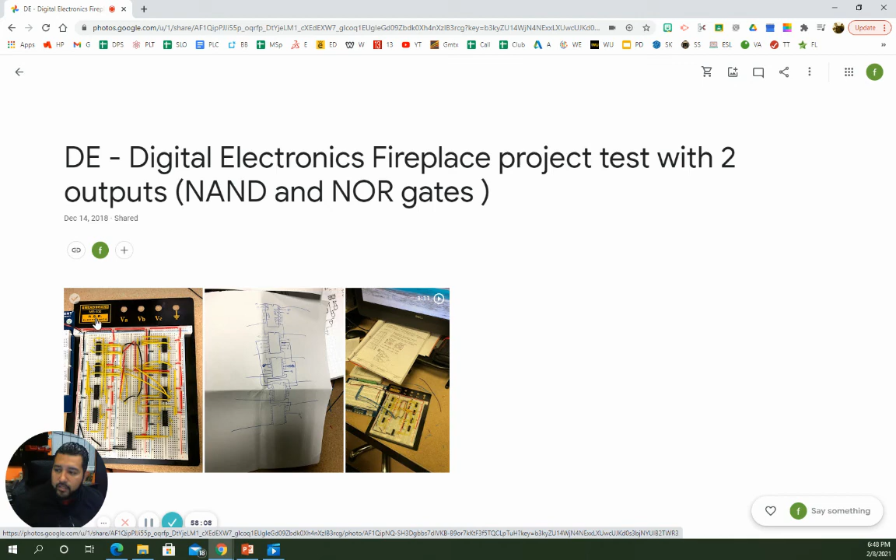This is for digital electronics. They have to create a map of a particular circuit, connect it and build it, and then test it out. That's a pretty cool experiment using NOR gates and NAND gates.

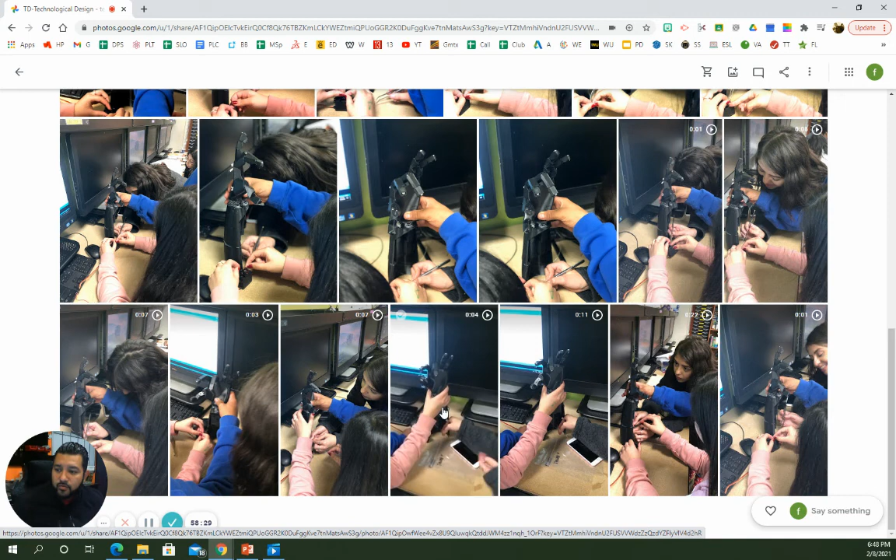We were talking about robotic arms earlier. I'm very proud of them. These two girls were able to do their whole experiment 3D printed, and you can see from here some videos where they were testing it here in school. They had to do different adjustments to their hand so that it can move differently. But they got really into it, to the point where they even came back the following year and helped out the kids of that generation in that particular class. So this experiment was a success, and they were able to see how it works and how to put it together. So that's the robotic arm.

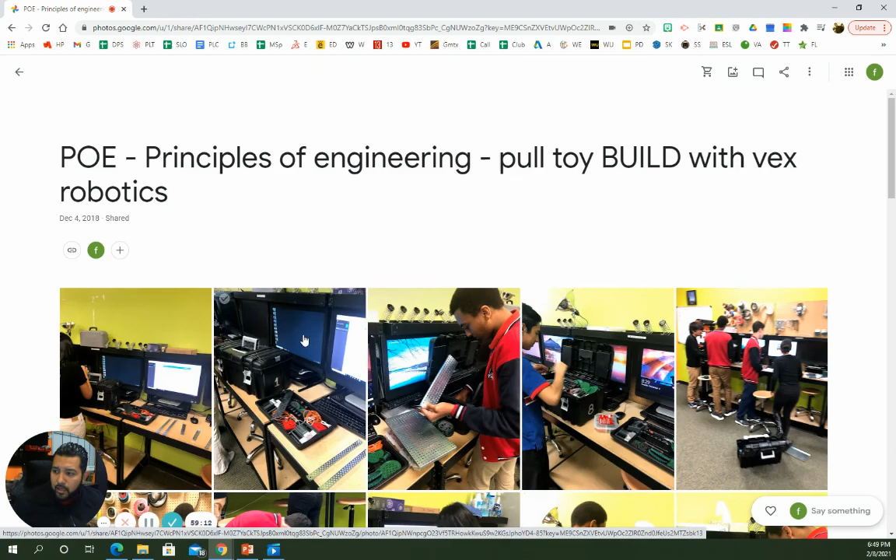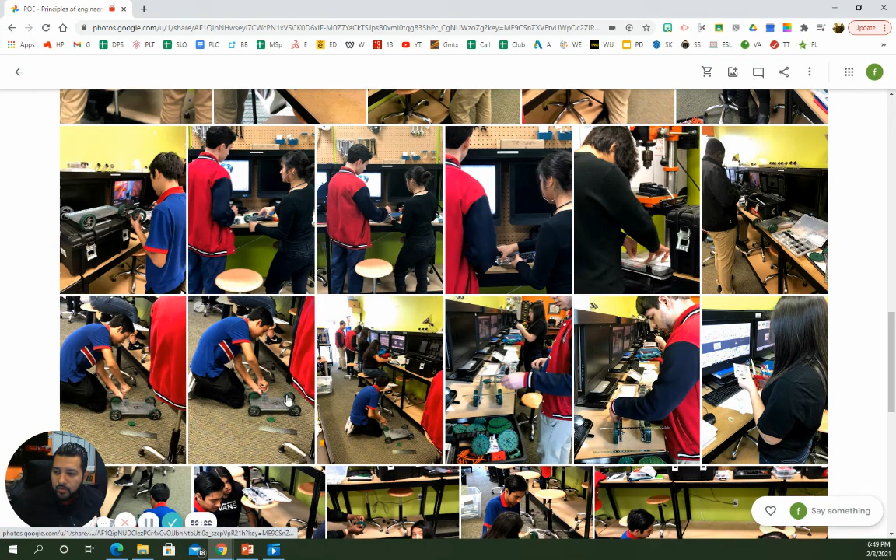We also have more simple experiments. Since we already have the robotics kits here, we do simple things like this one. You pretty much build a toy, a pull toy. They're working together here in class. Here's the pull toy, and they have this sort of platform, and they add stuff to it. This one is kind of like a Pac-Man, and it goes up and down. That's called the pull toy experiment.

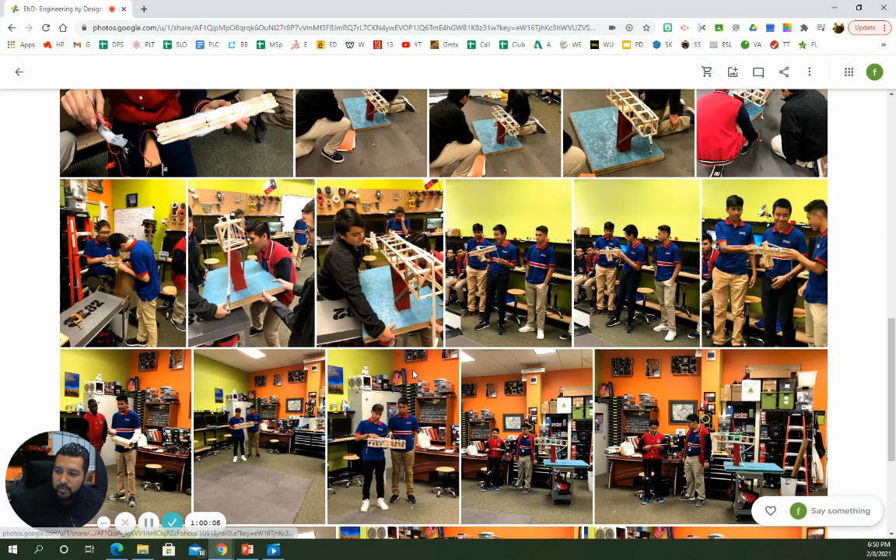I know I'm moving a little too fast. I'm kind of running out of time, and I wish I could present more projects. But here's the bridge project, that crane bridge project made out of popsicle sticks, and how they tested it during class. Here's microcontrollers and Arduinos. We have more Arduinos and sensors, 3D printing, and robotics related stuff.

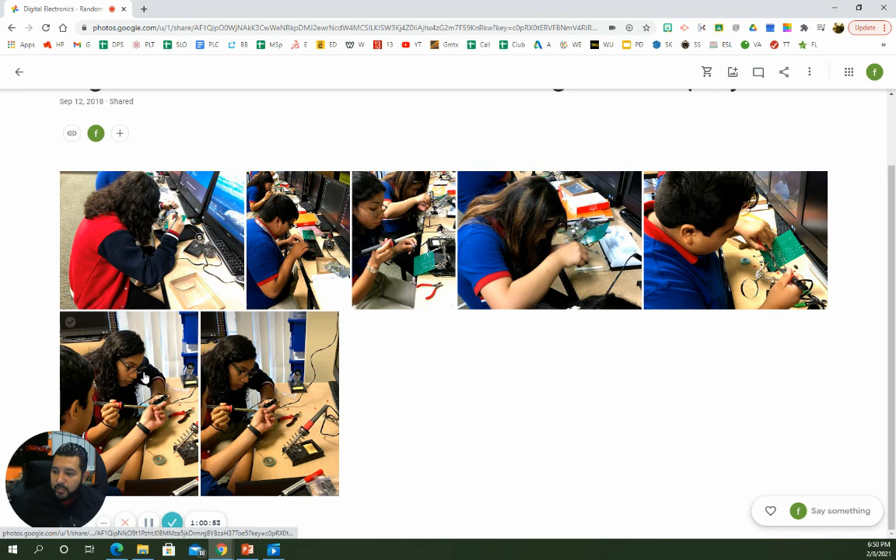They learned how to solder. They love soldering here, and were able to solder stuff. Learning how to solder is pretty cool because it gets them really entertained. And those kinds of things tied into some, not doing projects, but learning different skills.